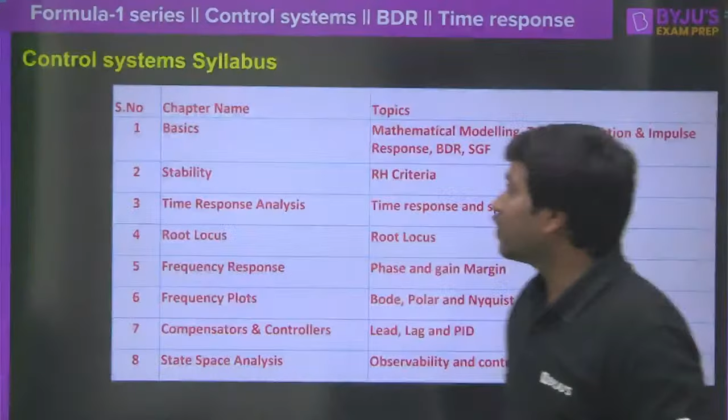So as I promised you, we are going to discuss control system, mostly the formulas, the important results, and important steps and procedures if you find any. Clear? So these are the chapters which we are going to cover.

All the topics are mentioned here, but focus on the chapters. Starting from the basics, we are going to see transfer function, impulse response, block diagram reduction, as well as signal flow graph. We will also see stability, time response analysis, root locus, and frequency response. Everything that is there in the control system we are going to discuss.

I am not going to leave any particular topic. As you all know, control system is a special subject, it will be having a minimum of 8 marks to maximum of 10 marks. So it is one of the most valuable subjects in the entire GATE preparation. If you are a serious aspirant, surely you will not miss any of the session.

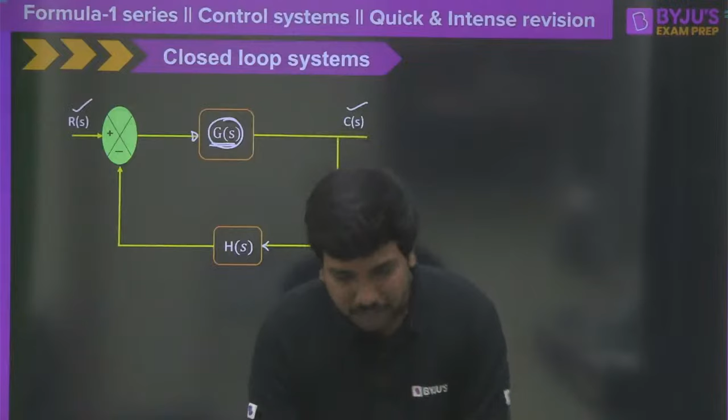The very first thing we require to understand is we are going to give our requirement or the target here, and people call this a set point. This is considered as the set point, and this is considered, of course, as the output of the control system. The ultimate purpose of the control system is...

...the response, that is C of t, must be as early as possible equal to R of t. That means at least this value should be as fast as possible to equal R of t, meaning the output of the control system should be equal to the desired target.

In simple words, suppose I am having an air conditioner. If I switch to 25 degrees centigrade, the 25 degrees given to the air conditioner is called the set point, and the room temperature is considered as the output of the control system. Ideally, what should happen?

If I give a set point of 25 degrees centigrade using the remote, the room temperature should finally equal 25 degrees centigrade. Then I can consider this air conditioner as a control system. To understand whether the output is really reaching the set point, and how fast it is reaching the set point, we must have the transfer function of the closed loop control system.

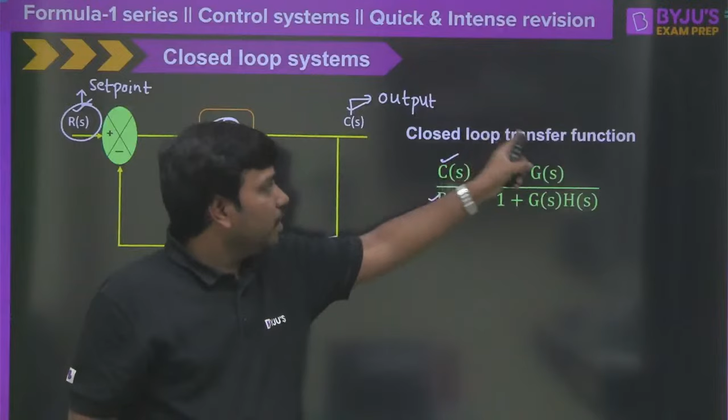As we see, the input R(S) is the input to the overall closed loop system, and C(S) is the output of the overall closed loop system. Therefore, C(S)/R(S) is called the transfer function of the entire closed loop control system. Now, the most important thing is the denominator of this closed loop transfer function, which is called the characteristic equation. Why is it called a characteristic equation?

Any one of you? 45 students are there. Love you guys, and I'm very glad to have a great response from all of you. Trust me, I will make this session wonderful and you will remember me your entire life. Please answer me and participate in the session.

Why do we call the denominator the characteristic equation? Because the denominator will decide the characteristics like stability of the overall control system, and it will also decide the time constant, time response, and many other characteristics depend on the denominator. That's why we call this the characteristic equation.

Now the most important thing is G(S) into H(S). Let me take another color so you will understand it better. This G(S) into H(S), some people call this simply the loop gain. Some people call this the loop gain, and of course, some people call this the open loop transfer function of the closed loop system.

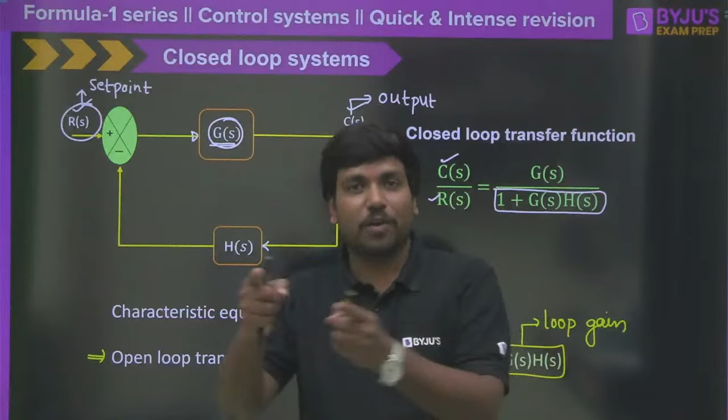Even I have seen many GATE questions where they simply mention open loop transfer function of the closed loop system, and many students will simply take this as G(S). No. If they say open loop transfer function of the closed loop control system, you must take that as G(S) into H(S).

Nice answers, right? Because poles will be decided by the characteristics of the system. More or less you have given the formal definition, but the truth is the characteristics of the system will be decided by the denominator. That's why we call that the characteristic equation.

Moving ahead, the very first chapter is very simple. However, it will be asked most of the times for 1 mark, and if you are lucky, there's a chance to get even 2 marks. Let me complete this topic quickly because there are very important topics coming soon. Let's give less importance to this since it's a very easy topic.

The block diagram reduction, as you know, has several rules, correct? Whenever I mention this topic, many students say that 8 to 10 rules exist - you take the point here, subtract here, add here, something like that. But trust me, if you are good at basic mathematics, you require only 3 important things for this.

The very first thing is, if 2 blocks are cascaded like this, then what will the result be? Any one of you? Please mention it. This is very simple, I know, but you should participate in the session so it will be more interactive and interesting, correct?

So if 2 blocks are cascaded, what will be the resultant block? The resultant block will be the product of these 2 blocks, correct? So G1 is the gain of the first block and G2 is the gain of the second block, and the resultant will be equal to G1 into G2, correct?

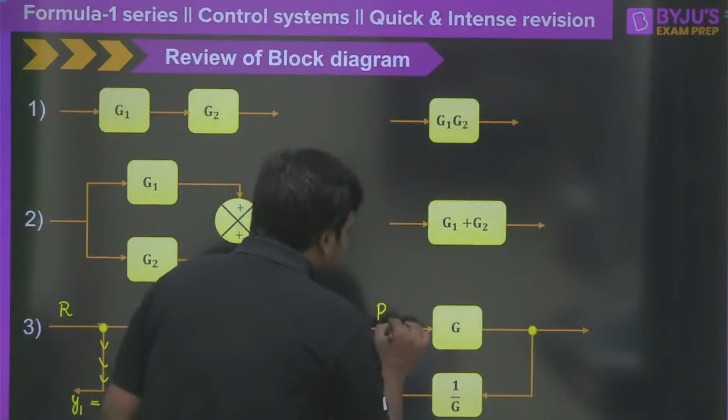Now how we can do? Simple. Suppose if you say it is still again R here, so then obviously this is going to become G into R. If it is G into R, then this will become G into R here, and G into R is multiplied by 1 by G. Then obviously you will be having R here, and once again I can say the output terminal here will be again it is equal to R. Clear? So that means if you take this point after the block, you must keep 1 by G here.

Now reverse is also possible. If you want to take this point after the block to before the block, then what we need to do? We need to multiply that with the G. That means 1 by G will be multiplied with the G, then obviously it will be having 1 like this. Clear? So these are the 3 things.

Yes, somebody is asking some question, right? Sindhu is asking some question. Sir, is this class enough to score control system?

Yes, obviously, because if you are sincere and if you are with me till the end, then only you can score. Okay.

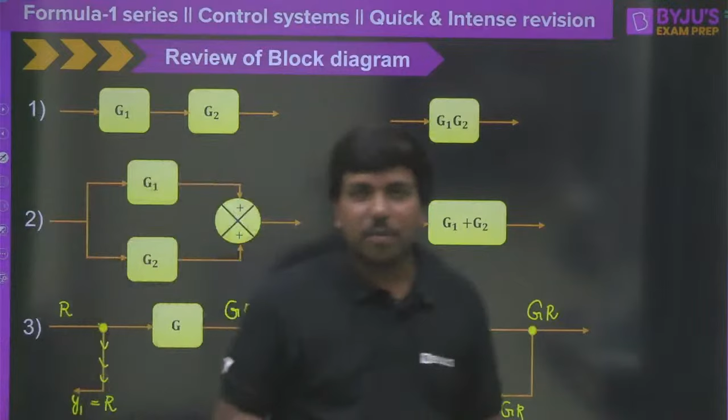Clear? Moving ahead to the next one, why negative feedback is more stable than the positive feedback in control system? Very good, Hrithik. So I will ask a simple question. Just assume that you and your brother are staying in the home, okay? And you and your brother both have fought, okay? So when you both are fighting, your father is the controller in your home, correct? So what your father has to do?

Whether he has to amplify the error or he has to reduce that conflict. He has to reduce the conflict. What happens in the negative feedback is, as the controller is understanding the error every time, it will act in such a way that the gap reduces between the actual target value and the present value. Clear? But in case of positive feedback, the error gets amplified.

Suppose your father is too aggressive. Already you and your brother are fighting. What is going to happen? Your father will come and shout like anything and he will slap you as well as your brother. Then what will happen? It is the amplification of the error, correct? So then the system will become unstable. One fine day you will say goodbye father, correct? So that is exactly the thing.

Clear? So now you can see the second thing, the signal flow graph, which is important in the control system subject, and sometimes it may be important even from the perspective of circuit theory also. So there are a few terms which you must understand one by one. I will go through that. After that, I will give the important formula related to the signal flow graph.

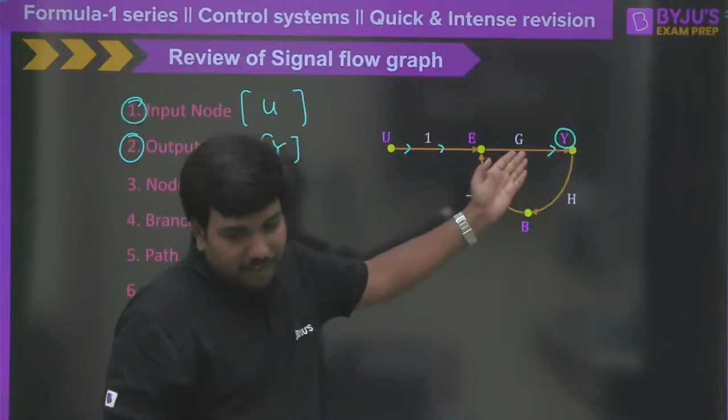Why? Because the feedback mechanism itself says that the output is taken from the end and given at the input side. That is called feedback. So from the output node, there is always a chance that you can take the data. So you must be very careful. That's why I see some students are saying no, and that's why I asked this question.

So now moving ahead to the third one, that is node. What do you mean by node? Simple. A node is a point of connection where at least two branches are connected, apart from the input node and sometimes even the output node. Now you can see what the nodes are here. U is a node, E is a node, and Y is also a node. We have only 3 nodes here.

Moving ahead, the next one is the branch. A branch is basically nothing but a path; in fact, a branch may be one single line in the path. So you can see here EY is considered a branch, UE is also considered a branch, and EY is also considered a branch. But what do you mean by path?

So path, you can say it has to have a starting point and ending point in a more defined way, and more importantly, see, from U to E and E to Y and Y to E, I can call this as a path, correct? U to E, E to Y and Y to E, I can call this as a path because I am able to travel along that, correct? So that is actually called a path, right?

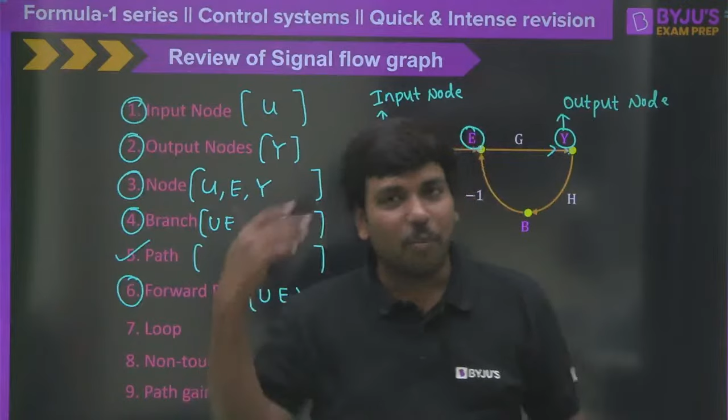Everybody is very actively participating. Keep like this till the end. Okay, same momentum. Because we have a lot of concepts to cover, Routh-Hurwitz criteria, root locus, gain margin, phase margin, polar plot, Nyquist plot, so many things are there, right? So be accurate and be on your toes.

Now loop. Loop means what? Start at any particular point, and you should be able to reach the same point once again, correct? So if we start at E here, from E I can go all the way to Y and then B and again E, correct? So therefore what should I say here? E, and then Y and then B, because B is also considered a node here, right? And then E here, correct? Of course B doesn't have any significance, but as it is mentioned, I am taking it. So E to Y, Y to B and B to E.

We can call that a loop if the starting node and ending node can be connected, correct? That means the starting node must be equal to the ending node. Now you see here when I write E, again E is coming at the end. So therefore this path is considered as a loop now.

Now can you tell me what is the gain of this loop? If I ask what is the gain of the loop, from E we are having G and then H and then -1. So when you are traveling along the path, whatever gains you have on the branches, you can multiply all of them to get the complete path gain, correct? So what is the complete path gain here? Minus G times H. Simple. Minus GH is considered the path gain, correct?

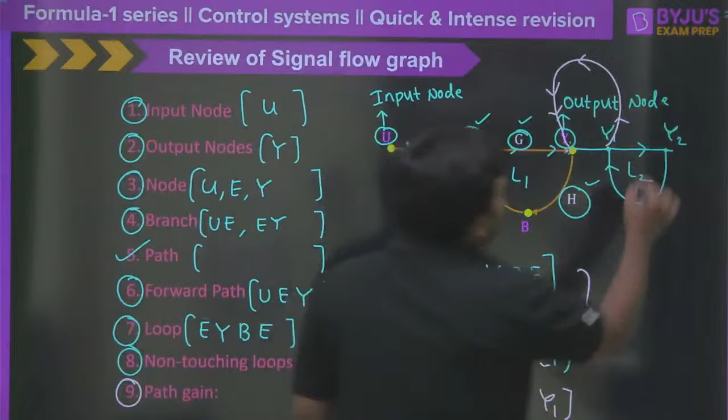Now let me go directly to path gain, which I already told you. Path gain means whatever gain you are getting throughout the path. Simply, I am asking a question: if this is 2 and this is 3, what is the loop gain of L2? Everyone answer this quickly. Y and Y dash are touching here? Where is Y dash? I don't show Y dash anywhere, right? Sindhu, where is Y dash?

Sir, can I crack GATE 2026 with AIR 50? Definitely everybody can crack, right?

So yes, 2 into 3, that is 6 here. That would be considered as the path gain. Path gain of what? Path gain of loop 2 here. I hope you understood the whole logic. So in short, I have explained each and every topic here.

Moving ahead, the overall transfer function or overall gain can be given by a special formula, Mason's formula, especially in the signal flow graph, which can be written as: transfer function equals the sum from k equals 1 to n of Pk delta k, divided by delta. In fact, n would be more appropriate here: n is the number of forward paths.

So if I say n equals 2, what does it mean? There are 2 different paths available to travel from the input node to the output node. So if n equals 2, the transfer function can be written as P1 delta 1 plus P2 delta 2, whole divided by delta, because k goes from 1 to 2. This is very easy to understand. Now let me explain each term.

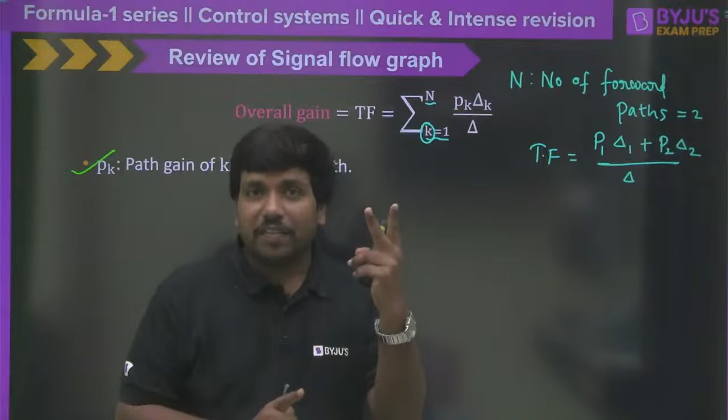Pk is the gain of the kth forward path. If you take the first forward path, you must use the gain of the first forward path; for the second, the gain of the second forward path. And n is the number of forward paths in the graph. Delta is the determinant of the graph, the most important thing in the entire Mason's formula. Delta is very simple: it can be written as 1 minus the sum of individual loop gains.

So can you tell me the individual loop gains? What is the loop gain of L1? Everyone please tell me, answer along with me. G and H and minus, so it would be minus G into H. That is simple. What is the loop gain of the second loop?

The second loop is 2 into 3; you already told me that is 6. So let me say this is 6. What is the third loop gain? Let us assume you started from here with 2, and this is 2 and this is 2. All the way, you will have 4 here.

Clear? You are having 4. Therefore, I can say all put together, there are 3 individual loops. We have to take the sum of all individual loop gains, and then sum of gain product of, this is very important, gain product of all combinations of two non-touching loops. This is wrong, 2 non-touching loops.

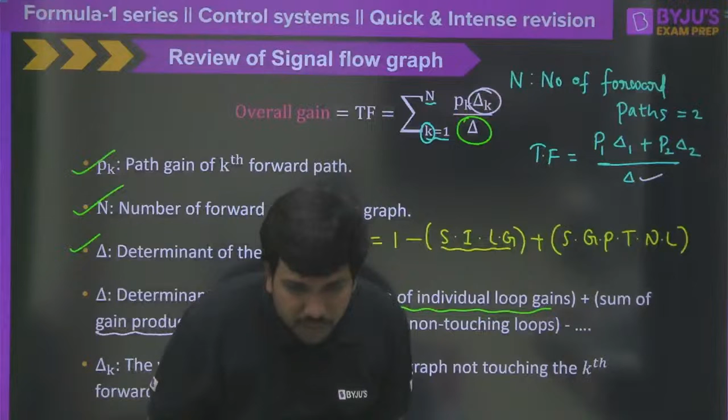Right? So this same formula you must apply, but everywhere this should be applied by not touching the forward path 1. Similarly, if you go for delta 2, it should not touch the forward path 2, but rest of the delta formula will be same. Now I have a question to every one of you. Most of the times, which kind of questions you have seen? 2 forward paths or 3 forward paths?

If you already solved the GATE previous year questions, you will understand that all GATE previous year questions on the signal flow graph are not at all difficult. Most of the times you will have maximum only 2 forward path gains. More than 2 they won't go. And sometimes they don't even go for 2. You will be having only 1 forward path. Clear? That's why this is sufficient to know here.

I hope I have covered the very first topic, that is signal flow graph as well as block diagram reduction. Of course, I have taken some time, but initially I may be taking some time, and once I pick up, everything will go very fast. Okay? Right, very good. Thank you very much. So first chapter is completed. So everybody, I need the response from you. Is it clear to all of you, or am I going a little bit fast, or you expect me to go a little bit fast? So many students are there, 60 students, everybody must answer to me.

The second chapter we are going to discuss is the time response analysis. So what do you mean by time response analysis? It's very simple. We will have a system, specifically a control system. We may apply different inputs and we will see how the response is varying with respect to time. Simple. Therefore, it is called a time response.

Suppose you have an amplifier, in analog electronics you will be seeing this. For the amplifier, we apply the DC input and see what the response is, so that is considered a DC response. After that, we apply an AC signal, AC input, and again see the response. So everywhere you are going to use the time response. Understanding the response with respect to time is called the time response.

This topic is not limited to only control system. It is there for circuit theory. It is there in analog electronics. Therefore, you must be with me till the end of this session. So moving ahead, the very first thing important to know in time response is different kinds of signals. So Hrithik is asking something.

Once explain delta 1 and delta 2, sir. Sindhu, I think you are learning this first time. Anyway, I will explain, don't worry. In a problem of signal flow graph, to find a transfer function, do we need to consider the loop gain at input node? Excellent question, Hrithik. I will make you answer this question.

The best example is, instead of using the letters, you use the numbers. At the input you started and again you came back to that. So what do you mean by input node basically? Input node means all the branches should go away from that. Suppose you have R here, let us call this Y1 and this Y2. You can call this the input node only if all branches are coming out of the node.

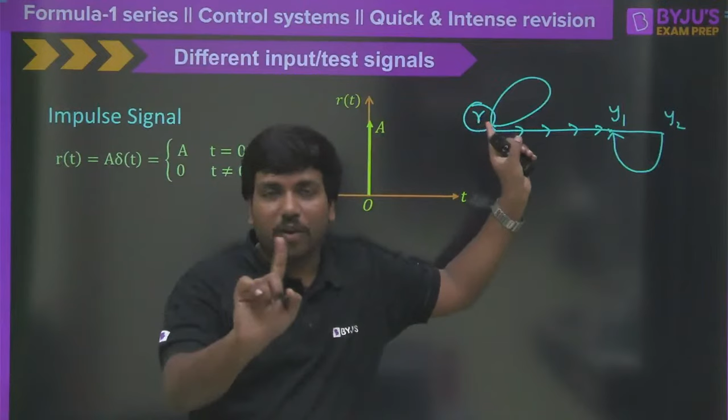But if there is a loop here, then how can you call that the input node? You cannot. So that's why usually when you have a loop at the input side, we will not take that into consideration. I hope every one of you understood this. Now let's move on to the next one, different types of input signals.

The very first test input signal we apply is the impulse, and we write the strength of the impulse. We don't call this the magnitude of the impulse; it is considered the area or the strength of the impulse signal. Exactly at t = 0 you will see a sudden spike with a strength of A. Therefore, we consider the input signal as r(t) = A δ(t). This has strength A only at t = 0; elsewhere the strength is 0.

Make a dummy node. Excellent, Satish. So to solve that question, when you have the same loop at the input node, we extend it and make a dummy node at the input side. That is the correct explanation. Now Hrithik, Samala, have you understood my explanation? I think Satish and Pankaj understood very well. I want to know whether Samala and Hrithik have understood it or not.

So nice. Now the impulse is very clear, but most of the time we need to know its Laplace transform. What is the Laplace transform of this one? Fatafat answer. Pramit, where are you? R(s) = A. Yes, clear, sir. Thank you. Now the second is the step signal. Step signal is nothing but a constantly maintained input.

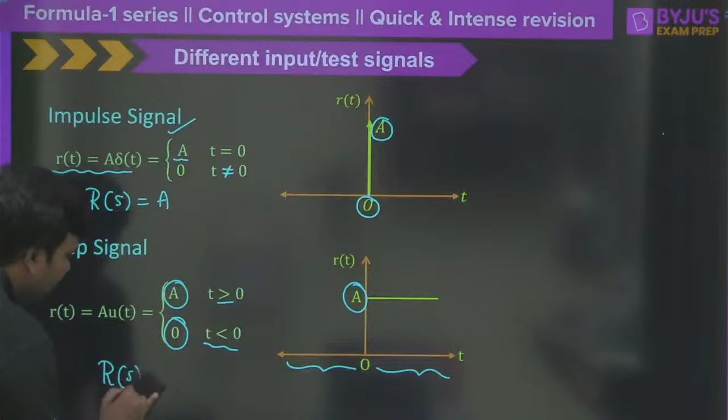And what is the Laplace transform? Obviously the Laplace transform R of S is equal to 1 divided by S. In fact, if it is A, then it must be considered as A by S.

Now likewise, we have another important signal called the ramp signal, which is R of t equals A times t into U of t. In this case, it is a linear function, meaning the signal strength increases with respect to time. The starting value might be 0, but as time progresses, the output value also progresses with a slope of A units. That's why it is R of t equals A into t into U of t. Therefore, R of S can be considered as A by S square. These things you need to keep at your fingertips.

Moving ahead to the next one, the parabolic signal. R of t, you can see, is like y equals m into x square, or y equals m into s square. This is how it is non-linear. But may I know what R of S is going to be here? Any one of you? Ashok, Samyukta, Hrithik, Satish, Pankaj, Pramit, Anita.

So can you tell me what the parabolic input Laplace transform is? There will be a square term, and 2 factorial will be there, so it becomes 2 divided by s cube. That is, 2 times A divided by s cube. I hope you understood this, is it clear to all of you? Yes, 2 by s cube, A is there, so don't forget that.

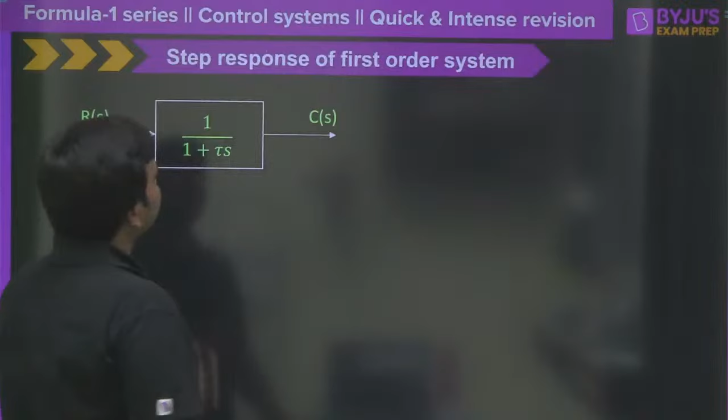Now let me move to the next topic, the step response of the first order system. Whenever I say first order system, let me clearly tell you, most students don't know this properly. They say C of s by R of s should equal ks divided by 1 plus tau s. But remember, in general a first order system means something slightly different. Today you are going to learn some new important points.

So please see here, if I say some general system, y of s by x of s, that is a general first order system: y of s by x of s equals ks by 1 plus tau s. Here, ks is considered as the static gain, steady state gain, or DC gain, and tau is considered as the time constant. This is known to everyone.

But whenever I say first order control system, that's different. There is a difference between a first order system and a first order control system. If I use the first order control system, then the output will be written as C of s, and the input must be written as R of s. This is the first order system, but this is the first order control system. Now tell me, if it is a first order control system, what must happen here? The difference is here you will be having 1 divided by 1 plus tau s.

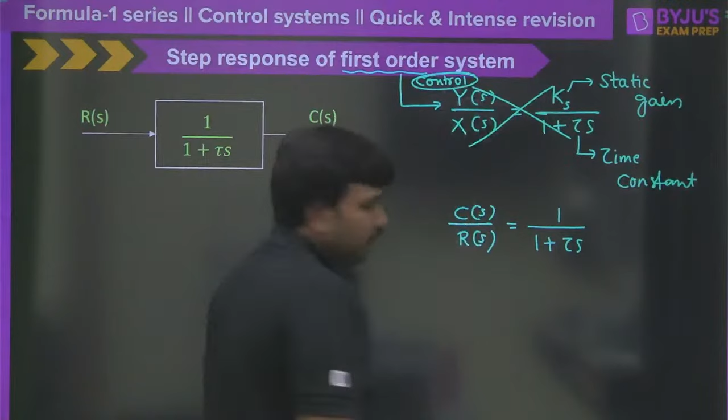So you must know what is the classical difference here. As we are not going to discuss about the system performance here, we are mainly aiming for the control system, correct? So let me take C of s by R of s is equal to 1 by 1 plus tau s, and we are having here C of s and R of s clearly here, right?

So now what is most important for us is the step response, because you can apply impulse, you can apply ramp, you can apply many things, but ultimately that is what we require to study here, because right now we are in Formula 1 series, right? So step response. Step response means what? What is the input we are applying here?

So R of t must be equal to, let's assume that unit step response here. If I say unit step response, R of t must be equal to 1 into U of t. Therefore R of s undoubtedly it will be equal to 1 by s. And you can multiply 1 by s with this 1 by 1 plus tau s and finally get C of s. And if you want C of t, how you will find C of t? You will find Laplace inverse of C of s.

But how we will be having C of s here? L inverse of C of s is nothing but R of s value that should be multiplied by the G of s value. Let's assume that this is G of s, for example, or T of s, K of s, anything, no problem, right? So this would be written as 1 by s into 1 divided by 1 plus tau s. And once you take the inverse Laplace transform of this, then you will get the step response, correct?

So probably you all might be knowing that step response here. So let me directly write down here. So the step response, obviously this is considered as a step response. Now every one of you must tell me one important factor here.

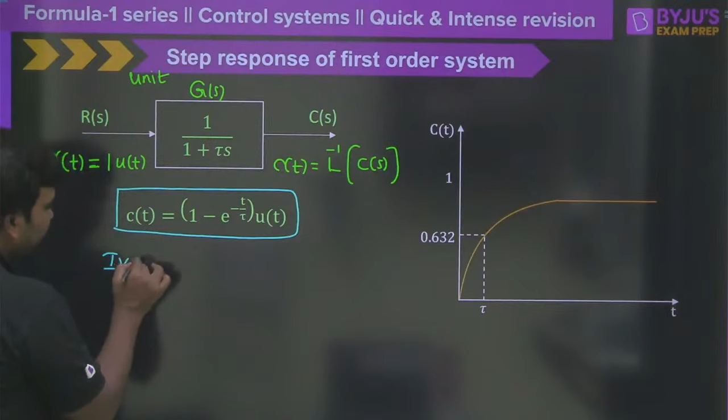What is the initial value of this response? Initial value. If I ask initial value, that is very simple to say. Initial value, let me write down, that is IV, which is equal to C of 0. Substitute t is equal to 0. Then it will become like 1 minus e power 0 whole, right? So 1 minus e power 0, that will be 0.

Simple. And what about the final value here? Final value means we will substitute t is equal to infinity, correct? When you substitute t is equal to infinity, then you will be finding that 1 minus e power minus infinity all the way this will be again equal to 0, correct?

Then if we start plotting the graph for C of t, which is nothing but the step response, this is the way how the graph looks like, correct? Most of you know this point, right? So the step input, let me say all the way it might be up to here, step input, and the time constant is nothing but the value where your output response, this is C of t, graph is C of t, reaches 63.2% of the final output if the initial value starts from 0, correct? So 63.2% of 1 is how much? It is 0.632. That's why it is called as a time constant.

Clear? Now everyone, t is equal to infinity, it should be like 1, sir, right? Oh, I am sorry, extremely sorry. Thank you guys, thank you very much. So small mistake, 1 minus e power minus infinity, so that would be equal to 0, so it should be equal to 1. Thank you very much. So now what is going to be the settling time here?

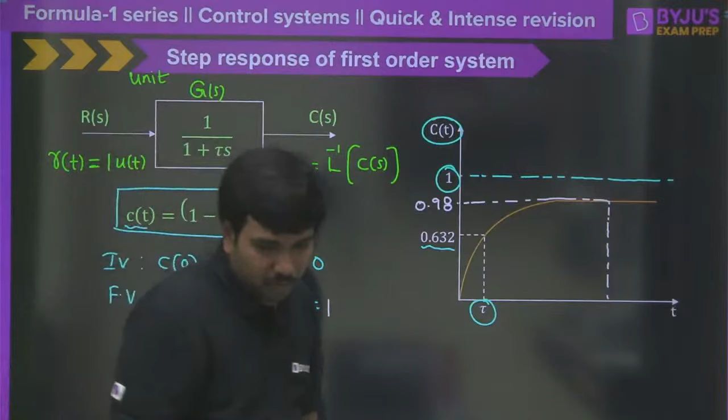What is the formula? E power minus infinity is 0. Anita, wrong, e power minus infinity is wrong. Just check it. Okay, e power minus infinity is 0. Yes, Anita, good. So tell me, what is the settling time here?

So this time where the step response reaches 98% of the final value, that particular time will be called the settling time, which is nothing but 4 tau. This is one important formula. Clear?

At the same time, rise time is another important formula here. Anyone, in first order system, what is the formula for rise time? Hereafter you must be very active and quickly answer my questions. Around 50 students are live, you must be fast and quick to give answers. You like me, you love me, so you must participate in the session too. So T rise is what?

T rise will be equal to 2.2 approximately. I am writing, don't argue with me, sir, it is 2.222 like that - don't say that. So it is approximately equal to 2.2 tau.

If anybody is very interested to know how this formula comes, what is the meaning of rise time, and how to derive it, you can refer to my BYJU'S exam prep lectures, recorded or live. There you can find the definition, derivation, everything. If I start to derive everything, the purpose of the whole session will go off.

So rise time is equal to 2.22 tau and the settling time, as I was saying, is equal to 4 tau here. Clear? Now let's move on to the next one, that is the second order system.

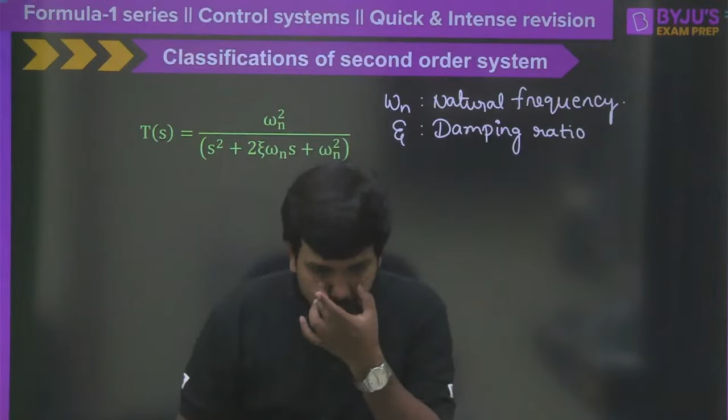Gajendra Singh, wonderful question you are asking - sir, why is rise time 10 to 90% in some cases and 0 to 100% in some cases? Good question, I'll tell you simply. Whatever input you apply for whichever system, we generally expect a quick response. If the response is very quick, then we will take 0 to 100% because there is a chance it may reach from 0 to 100%. But if you feel the response is not so quick enough, then we will aim to take from 10 to 90%. There are two reasons.

Reaching 100% may take a lot of time, so we cannot conclude that - that's why we keep the higher limit as 90%, and 0% it may start very fast, that's why we start from 10%. So everything is for our comfort here, because sometimes the system may start with a huge immediate response and even touch the final value of 100% in very little time. If that is the case, you can consider rise time as 0 to 100%. But if you know it will take a lot of time to settle at 100%, then we limit ourselves to 90% because we don't have the patience to wait for 100%. Clear?

I hope Gajendra, it's clear to you, right?

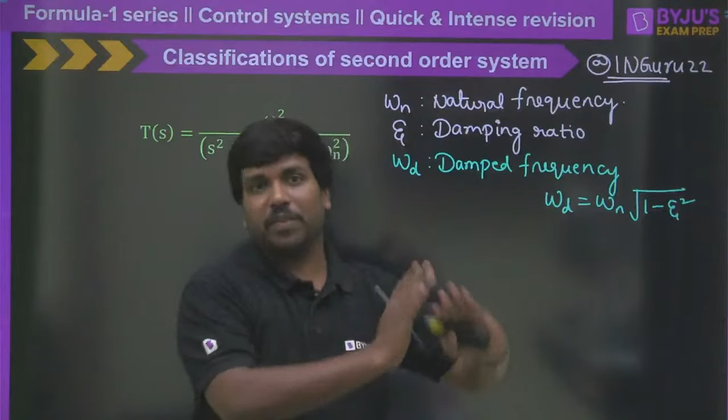So the natural frequency of the sinusoidal wave coming out of the oscillator depends on the inductance and capacitance. Means charging elements. Clear? That means in a very complicated system, look at which are the elements that cannot react instantaneously. Natural frequency depends on those elements. Suppose if you take RLC circuit, we all know very well that in RLC circuit, inductor and capacitor cannot react very fast.

So that's why these two will participate in deciding the frequency of the waveform, because they will be exchanging the energy, right? So that is the principle. I hope you understood that. I think today I have given a wonderful statement. So who is this? Harinataraju, please tell me, have you got the point now? And this is a new point. Thanks for asking this question. I think many of the students got today only how natural frequency is going to change. Yes, very good, Ravi Shankar.

Now, omega d is considered as a damped frequency. However, depending upon the zeta value, the second order systems will be classified like this. If zeta is equal to 0, we call that an undamped system, and if zeta is in between 0 to 1, we call that an underdamped system. If zeta is equal to 1, critically damped, and zeta greater than 1 is considered an overdamped system. Now moving ahead to the next one, the step response of second order system.

That means we will take the second order control system, because we are in the topic of control system. So take the second order system and apply the step input, especially for underdamped system. Underdamped system, zeta must be in between 0 to 1, correct? For that kind of system, if you apply step input, then you will get the step response like this. The step response will be exactly like this.

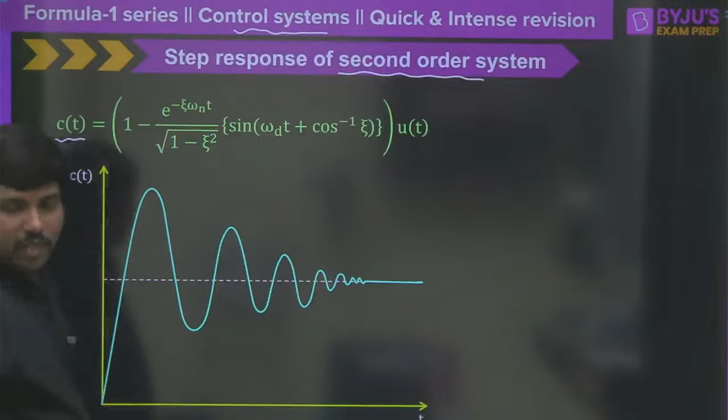In this step response, the most important terms are 1 minus e power minus zeta omega n t over under root of 1 minus zeta square, sin omega d t. Each and every term you know here. The only point is cos inverse of zeta. Some people are not interested to write it, so they will write this as phi. So if you start writing this as phi, how will the whole formula change?

Now the whole formula can be written as 1 minus e power minus zeta omega n t, whole divided by under root of 1 minus zeta square, into sin of omega d t plus phi. Clear? So this phi could be written as cos inverse of zeta, or this phi can be written as, look at that, this is very, very important.

Sometimes you may be asked many questions on this. Sin inverse of under root of 1 minus zeta square, or it can be written as, so this is again one more formula. It can also be called tan inverse of under root of 1 minus zeta square divided by zeta.

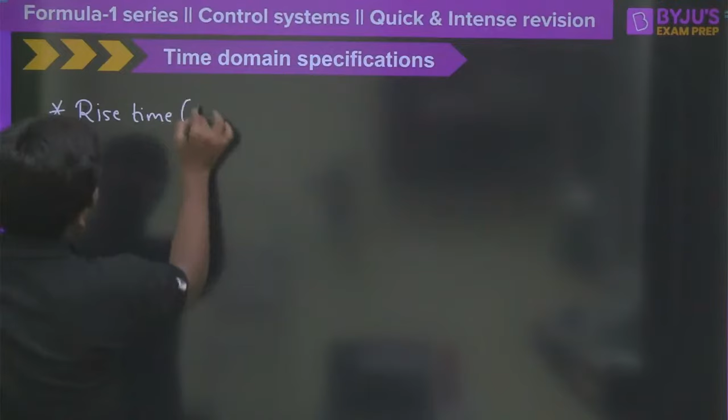Let me know first of all what is a very important formula here. Rise time, correct? Because you people are looking very sincere, let me write down everything here. So the first point is rise time. What is the formula for rise time? Don't see any notebooks, just listen to me and recall your concepts. So the rise time could be written as pi minus phi divided by omega d. Is it correct or not? Pi minus phi by omega d.

Where pi is a simple value, that is 3.14, and phi is nothing but cos inverse of zeta. Everyone start recalling the formulas one by one, because we are in a race, right? So pi minus phi divided by omega d, where omega d is omega n under root of 1 minus zeta square. Don't keep any notebook with you, just follow me and listen to the class.

The second important formula here is peak time, and here the real game will be there. Peak time means the time taken for the output to reach the peak value. Correct? That would usually be given as n into pi divided by omega d, and many times there is a question on this topic.

Many times, so many times they ask the question on this. So tell me what is the value here. Suppose for n is equal to 1, 3, 5, etc., you will be getting first, second, third overshoots here. Clear? So you will be getting first, second, third overshoots. In fact, I can say if the value of n is an odd number, you will be getting the overshoots.

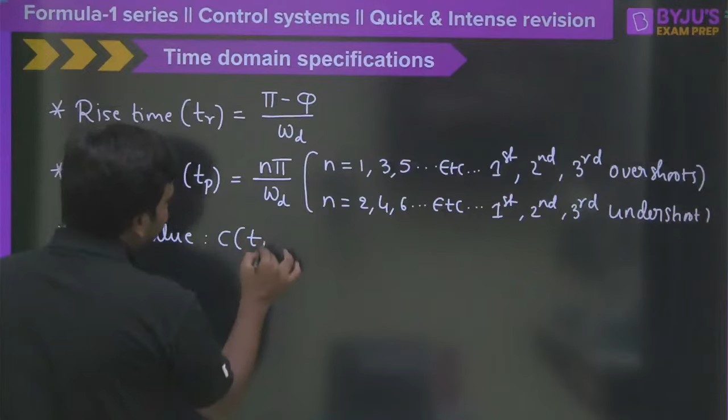And the next one, what is the next one? Next one is peak value. What is the peak value? How do we find the peak value? Simple. Peak value could be written as C of tp. Very easy, right? So go back here, substitute the peak time in the expression, then you are going to get the peak value. Simple, very easy.

Now the next and most important thing, countless number of times they ask this question, that is percentage of peak overshoot. So let me write down percentage of peak overshoot. POS means peak overshoot, which we call Mp. Any one of you, what is the percentage of peak overshoot? It should be written as e power minus zeta pi by under root of 1 minus zeta square, whole into 100. Clear? This is the percentage of peak overshoot formula, which is again very, very important.

And last but not least, settling time. So now you should be fast enough. Settling time, there are two formulas. One is 3 by zeta omega n, and ts is equal to 4 by zeta omega n. Tell me what is the difference between these two? Any one of you, what is the difference?

4 by zeta omega n is for 2% band of the final value. Output must reach within plus or minus 2% of the final value. Clear? Here it is going to be the 5% criterion, so that is 5% band of the final value. Clear? So hope you understood these two things. Many times I have seen the questions will be very straightforward. They will ask what is the settling time for the 2% criterion. 2% criterion means you should take 4 by zeta omega n.

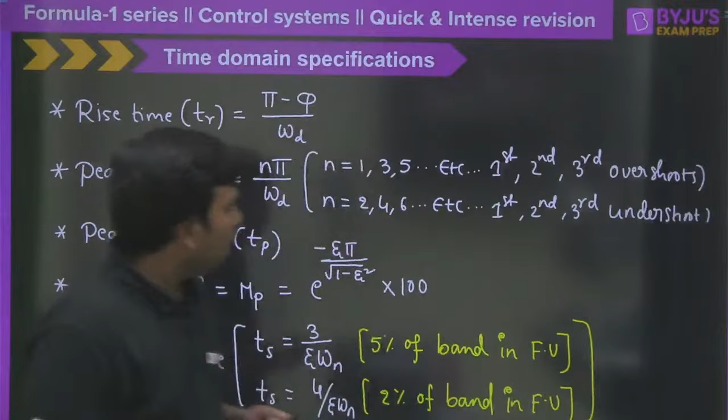So moving ahead, steady state error. I will tell you the easiest way to answer any question in steady state error. Don't run behind the formula.

In this case, don't run behind the formula. Try to restrict yourself to the basics. Don't go like, different formula for non-unity feedback system, different formula for unity feedback system, all these things, right? People made so many complex things. Easy way is, look at where the question is.

Error is actually nothing but, listen carefully, it could be written as simply E of t, which is nothing but the difference between the target and the present value. This is a simple catch, right? You need not mess up anything.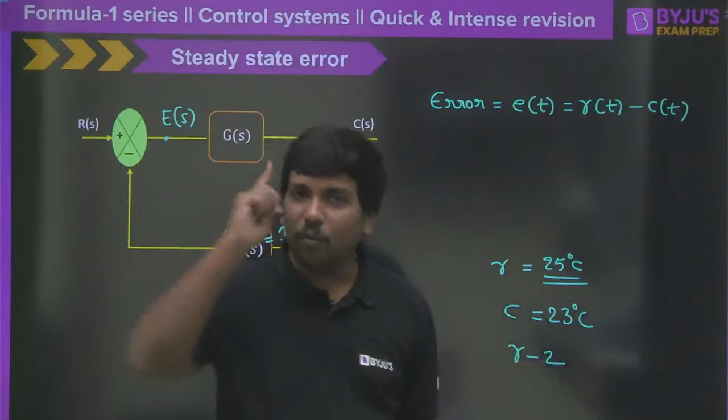If it is clear, then don't worry about whether unity feedback is given or non-unity feedback is given, how to convert non-unity to unity, unity to non-unity. This many formulas are not required. The only thing required is error E of t is equal to R of t minus C of t. But by God's grace, 99.9% of the time you will be given a unity feedback. So you will be lucky, right? So this is mentioned like this.

Now moving ahead, E of t is known to you. Then what does steady state error mean? Let me write down steady state error as SSE, which is equal to error at t equal to infinity. So it could be written as E of infinity equal to R of infinity minus C of infinity. That means wait for some time and see the difference between the desired input and the actual value of the output. The desired input is R of infinity, the actual value of the output is C of infinity.

In our case, R of infinity is 25 degrees centigrade. Means after 20 minutes also, the required room temperature is still 25 degrees centigrade. But C of infinity is 23 degrees centigrade. That's why we have 2 degrees centigrade as an error. Clear?

Some people are not very happy with writing this. Rather, they will convert this into the Laplace form. If we convert this into the Laplace form, the error E of s could be written as R of s minus C of s. And if you want E of infinity by using the final value theorem, E of infinity can be written as limit s tends to 0, s into E of s. And as we know here, limit s tends to 0, no problem with this one.

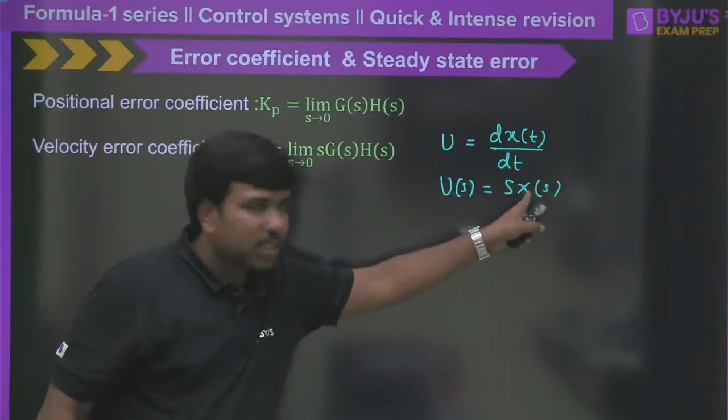how do you get velocity? Velocity is equal to dx of t by dt. Correct? So if you take the Laplace transform of velocity, what are you going to get? s into X of s, if the initial value is 0. That means for the velocity error coefficient, you should multiply with s. That's why it is limit s tends to 0 of s into G of s into H of s. Additionally, we have s here for the velocity. Simple way to understand. Correct?

And you may ask, sir, what is this positional error coefficient and velocity error coefficient? As I was saying, if anybody is too much interested to know the concept, please go to the lectures. Let's discuss the formula here. The acceleration error coefficient could be written as limit s tends to 0 of s square into G of s into H of s. Clear? These things are sufficient to answer any question in steady state error.

But there is one table in steady state error, and most of the students regularly ask, sir, please discuss the table. I know personally that the table is not required to answer any question, but for your satisfaction I have to do it. So let me explain that also. Here, if I take step input, then ramp input, and the last one is going to be parabolic input.

Now, if I start the left side with the type 0 system, type 1 system and type 2 system. Clear? What do you mean by type of a system? Pramit and Ashok and all of you, please tell me. Type of a system is nothing but the number of poles at the origin. Suppose G of s is equal to 1 divided by s square into s plus 1.

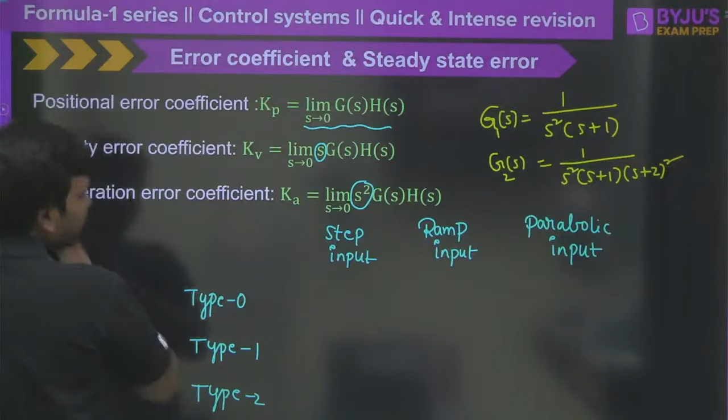What is the type of the system? And G of s is equal to 1 by s square into s plus 1 into s plus 2 whole square. So what is the type of the first and second system? Every one of you must answer this. Type of the first system is the number of poles at the origin, that is 2. And even in the second case, number of poles at the origin is 2. So therefore it is going to be 2.

Clear? So why are we so interested only in the type? Why not the order? Have you ever investigated this? It will be so interesting. Mathematically you may say that s will get cancelled in the calculation of steady state error, that's why we take the type.

No, the idea is, if you look at G1 and G2, the type remains same, but the order may be different, correct? So what does it mean? If you go with the type, then we can generalize the steady state error. If you go with the order, we cannot generalize, because G1 and G2 might have the same type but different order. So it is better to take the type of the system as the reference rather than the order of the system.

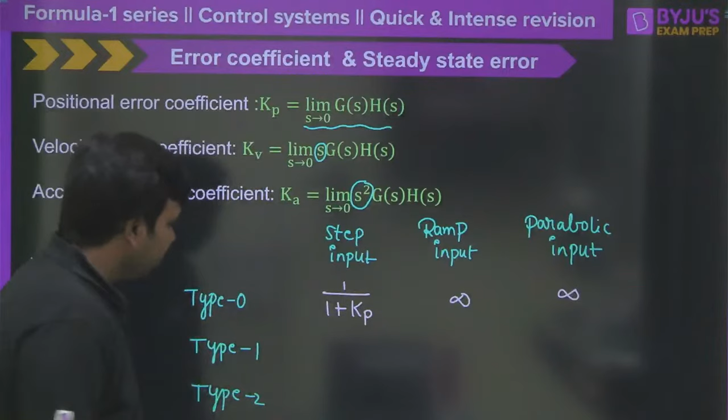Next, type 1 system: this is 0 here, because when we apply the ramp only velocity error will exist, so that is velocity coefficient 1 by kv. Of course this would be considered as infinity.

And the third one, it is 0 and 0, it is going to be 1 divided by Ka. If you can remember this formula, directly you can see the question, look at what input you are applying and what is the type of the system. If you know these two things, directly you can solve the question. That is one easy thing.

As I was saying, I have topped the GATE more than 10, 11 times. My personal experience says that instead of going for kacha-bicha formulas, it is better to believe your basics. The reason is, there is a chance they may ask the question if the feedback is not having unity gain. In that case, this concept will help you.

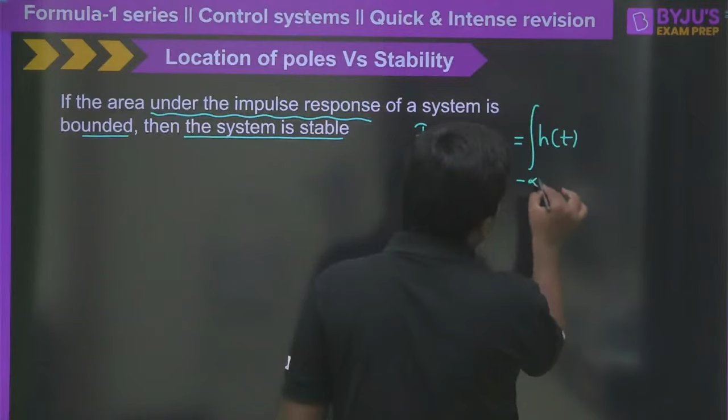What we do is take the area under this curve, that is from minus infinity to infinity of h of t. If this area under the curve is finite, then I can say this is the bounded output, or the area under the impulse response is bounded. So the system is a stable system.

How do we need to use the dominant pole concept in solving the problem? Are you asking how to solve for the dominant pole, or asking what is the practical significance of the dominant pole? Please let me know the question clearly.

Bibo says finite input range. Excellent. Hrithik, please let me know, do you want me to explain the physical significance of the dominant pole concept, or do you want me to explain how to solve the dominant pole question? Please let me know.

So suppose let us say, there is one particular system.

Assume that there is some system here. Its impulse response h of t is coming equal to e power minus 2t. E power minus 2t is the impulse response.

Now tell me, for this system, if I integrate the response, or find the area under the response, is it finite or infinite? In solving the question, you want the mathematical application. Please Hrithik, just hold for 2 minutes, I will explain, don't worry.

H of t is equal to e power minus 2t. Now the most important thing is, if you look at the graph of h of t, it goes like this. This is the exponentially decreasing graph. So what does it mean here?

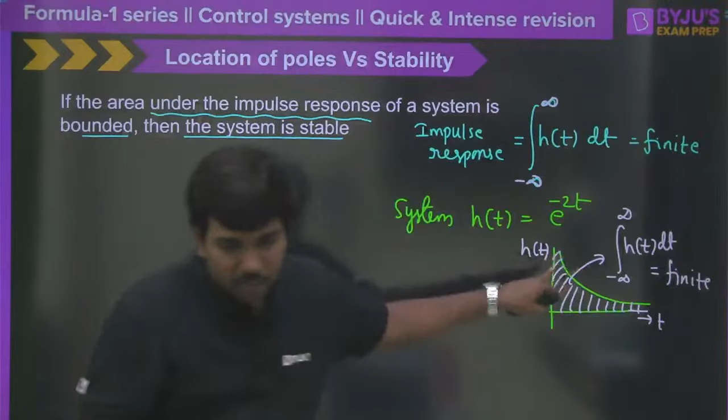So now I request you to take the Laplace transform of this one. What will you get? 1 by s plus 2, correct? E power minus 2t means it is 1 by s plus 2, isn't it?

This means, what is the pole of this one now? The pole is going to be, look at that, pole is s is equal to minus 2, am I right? Pole is equal to s is equal to minus 2.

What does it mean? If the pole is a negative value, that is minus 2 or negative real number, then I am sure that you will get an exponentially decaying response in the impulse, and then the area under the impulse response is bounded. That's why we call this a stable system by using the BIBO principle.

Now I will explain another way. So this is system 1. System 2, if you look at, h of t might be like e power 2t here. E power 2t. In this case, what will happen? It is an exponentially increasing graph here.

So if you start collecting the area under this graph, it will become infinite. That's why if you look at the pole of this one, how it looks, 1 divided by s minus 2, if you take the Laplace transform of this one. So the Laplace transform of this one is going to be 1 by s minus 2. That means the pole is there in the right hand side of the s plane.

So the impulse response is unbounded. So the system is unstable. That means technically we may speak only with respect to the location of the pole in the s plane. But basically, location of the pole in the S-plane inherently explains the impulse response, or informs you about the integration of the impulse response.

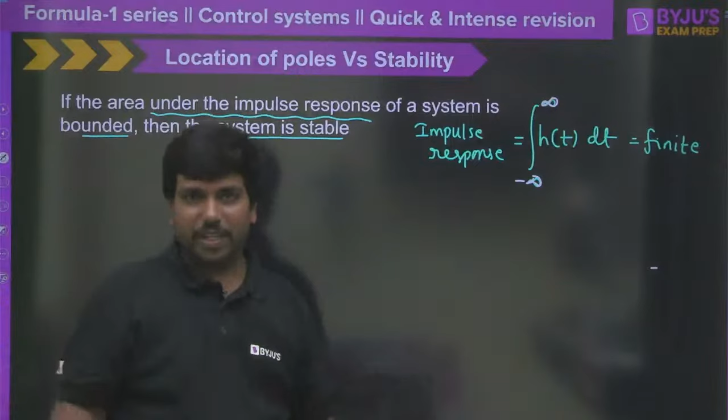So in short, it is very difficult to go with each and everything here. So the very important thing is, if all the poles of a system, any system, closed loop or open loop, lie in the left half of the S-plane, then the system is stable.

So if they ask a question like whether the closed loop system is stable or not, you should look at the closed loop poles. If they ask about open loop, you should look at the open loop poles. If all the poles, not even a single pole, lie on the right hand side, all poles must stay in the left hand side of the S-plane, then I can say the closed loop system is stable.

Second, if one pole lies at the origin, or complex conjugate poles lie on the imaginary axis, then the system is marginally stable. This is very, very important.

If at least one pole lies at the origin or there are complex conjugate poles on the imaginary axis, then this system is marginally stable. Yes, this is correct. What do you mean by that? Let me tell you in a simple way.

First case: look at the S-plane, with sigma and minus sigma on one axis, and j omega and minus j omega on the other. All poles might be anywhere on the left hand side - one pole, another pole, a third pole, like this. If all poles lie in the left hand side of the S-plane, then the system is stable. Absolutely it is stable, correct?

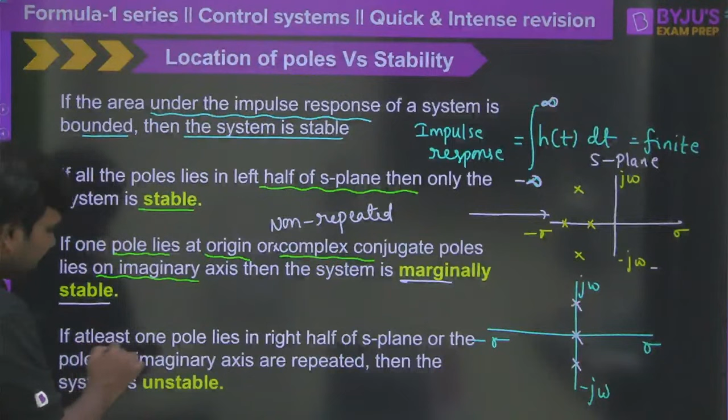And in case the poles on the imaginary axis are repeated, look at that - if at least one pole lies in the right hand side of the S-plane, this is very, very important, at least one pole lies in the right side of the S-plane, or the poles on the imaginary axis are repeated, then the system is unstable. Clear? Then the system is unstable.

Now I will ask a simple question to everyone. This is for explanation purposes, but in the notes you must have all these 3 points. So everyone take your rough paper and pen with you and answer the questions I am going to put now. Everyone must be fast enough to answer.

Suppose I have the j omega axis like this, with j omega, minus j omega, sigma, and minus sigma. Now, can anyone tell me - suppose I have one pole here and another pole here, written like 2j and minus 2j. Tell me whether this system is marginally stable or unstable. Everyone, fast, all 42 students should answer this question.

If you are having the poles only on the imaginary axis, this is a marginally stable system, correct? It's not repeated, it's there on the imaginary axis. Now if I have one more pole like this - yes, because if you are having non-repeated poles on the imaginary axis, then the system is a marginally stable system.

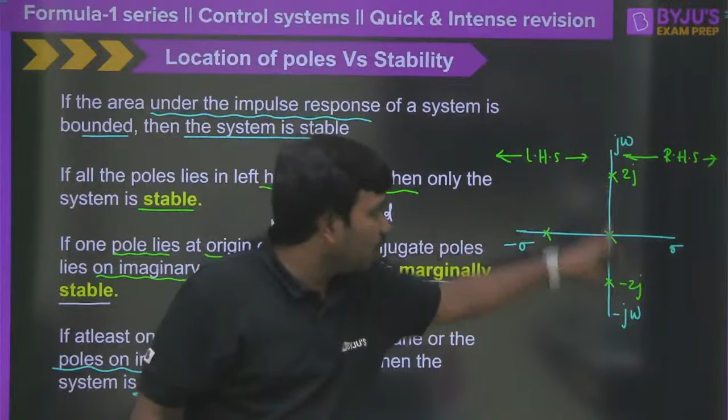Now I will ask a simple question. Suppose if I say you have two poles at the origin, then everyone tell me, what is going to happen? The whole system now will become unstable. Why? Because the pole which is there at the origin, on the imaginary axis, is repeated, correct?

If it is repeated, as I said, if the poles on the imaginary axis are repeated - and the origin is also on the imaginary axis - repeated, then the system is unstable. That means the addition of a pole, or the pole placement, can change the stability of a system.

That's why control system is very interesting. I can make a stable system an unstable system, or I can make an unstable system a stable system, only by changing the location of the poles or adding new poles into the existing system. Clear? So hope you understood this one, right?

So interesting. Now tell me, suppose there might be a chance that we have 1 by s. This is a marginally stable system. If I want to make this intentionally unstable, what will I do? I will just multiply it with an integrator. So this is the exact system and I am cascading it with the integrator. When I cascade the integrator to the existing plant, in total it will become 1 by s square. Then you are going to get repeated poles there.

That means if we have G of s as 1 by s, Gp of s or the plant transfer function as G of s, and if you use the controller as 1 by s, that is the integral controller, then the integral controller is connected to the 1 by s plant. Then what is going to happen? These two, when they are cascaded, become 1 by s square. Then the poles will be repeated and the closed loop system will become unstable.

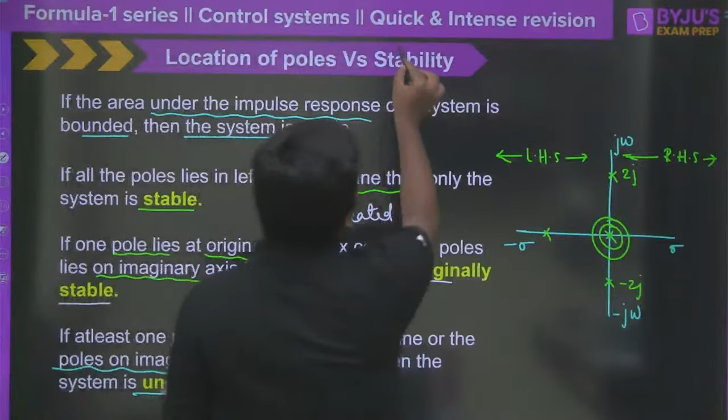So this is the way we are able to say whether the system is stable or unstable just by looking at the pole placement here. Clear? Right. So now moving ahead to the next one, there are several tools for finding the stability, right? The best technique, in fact the fundamental technique, is the RH criteria. I should say that even root locus can also give the stability analysis. Not only root locus, right? In root locus, the advantage is it is going to give the time domain specifications also.

And then stability can also be found by gain margin and phase margin, and stability can also be found by the Bode plot, polar plot, and Nyquist plot. So the context is, whatever you are going to study from now onwards, more or less the main intention is to find out the stability. Clear? Sir, waiting for root locus. Okay. I am coming to root locus, right?

Sir, it also improves our knowledge. Good, very much. Thank you very much, Pankaj. You people are really motivating me. Even today I am not feeling so well, but after seeing your energy and your interest, I am also getting boosted.

Okay, right. So now moving ahead to the Routh-Hurwitz criteria, as I was saying. Consider the nth order characteristic equation. First of all, how to construct the Routh table. Suppose you have a polynomial like this, what will we do? First we will frame the fundamental rows of the Routh array, starting with s power n, s power n minus 1, and here we will have s power n minus 2, something like that, and we will go up to s power 0 here.

Clear? So when you are writing the data here, first we will write the coefficient a n, leave the next one, go to the next coefficient and write it here, and leave the next alternate coefficient and write down this one. For s power n minus 1, we will write the intermediate ones. That means when writing the s power n minus 1 row, we will first take the s power n minus 1 coefficient, then leave the next one and go alternately like this. These two rows are called the fundamental rows of the Routh table.

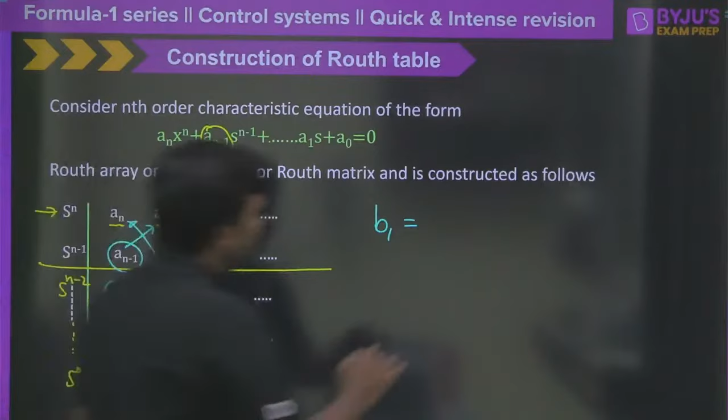After framing the fundamental rows, the immediate observation is you have to make b1 here and b2 here. What is the value of b1? Simple. b1 can be written as this into this minus this into this, divided by this, correct? So this value will be equal to a n minus 1 into a n minus 2 minus a n into a n minus 3, whole divided by a n minus 1. That is b1.

So this value should be divided with this. So this is an minus 1. Similarly, b2, if you do it, what is the value of b2 here? So b2 means from here to here you have to take, and this to this, of course, and divided by this one. So therefore, I can write down clearly that it is going to be equal to an minus 1 into an minus 4 minus an into an minus 5, of course, divided by what should be there here. Again, it is going to be an minus 1. Likewise, we will continue the same thing.

Sir, explanation is secret of our energy. Sir, thank you very much. Thank you very much. Right.

So this is the way we will continue the Routh table. Just as I required to explain this, I am explaining, but I feel that every one of you know about the Routh table. Correct? Without any idea about the Routh table, you people might not be sitting in this class. Correct or not? So let me directly go to the conclusions. How do we find the stability here? So the easiest thing is, if there is no sign change in the first column of the Routh table, then the closed loop system is stable. Clear?

Now I have a second question. For a given characteristic equation, we will try to find out the Routh table. So it may be like s power 3, s square, s power 1, s power 0. And when we do all the calculations, we will look at the first column of the Routh table. And if there are no sign changes in the first column of the Routh table, then we say that the closed loop system is stable. Now I will ask the questions the reverse way.

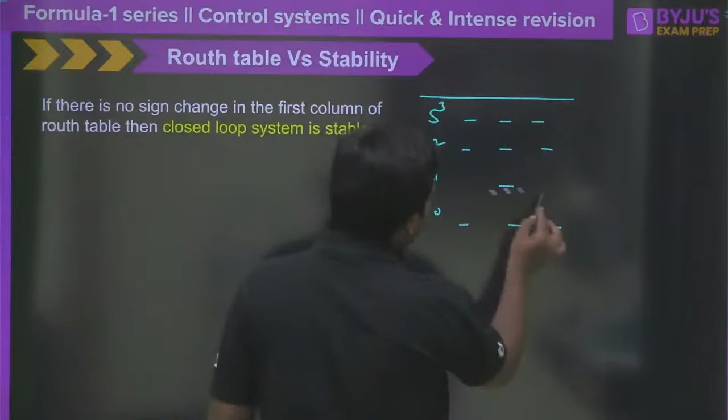For example, assume that for a particular case, I framed the Routh table. I am taking an example here. s power 3, s power 2, s power 1, s power 0, and it is like 3, 4, 5, and here minus 3 and 6 and 7, and here maybe 2, 0, 1, and here 1. Now tell me whether this system is stable or unstable. Every one of you, Ashok, Narasimha, Ravi, please let me know.

So if you look at the first column of the Routh array, there is a sign change. Here it is a positive number, here it is a negative number. That means one sign change is there. Again from negative to positive, the second sign change. Therefore, we say that this system is unstable. As there are two sign changes, two roots of the characteristic equation lie in the right hand side of the S plane. Clear? So therefore, we can write down the conclusion like this.

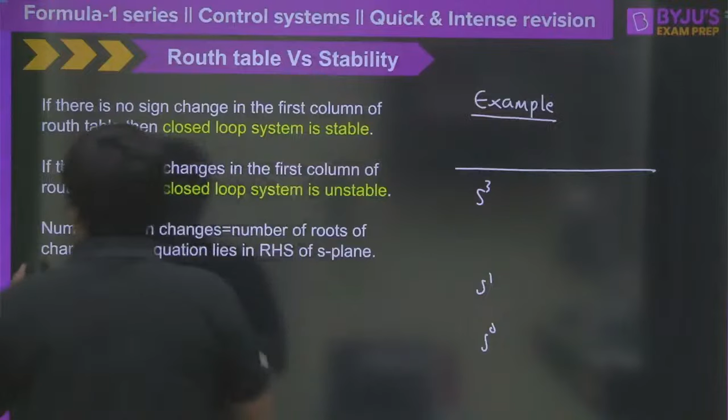If there are sign changes in the first column of the Routh table, then the closed loop system is unstable. Of course, the number of sign changes is equal to the number of roots of the characteristic equation lying in the right hand side of the S plane. Now I have one beautiful question to all of you. Just revise with me, just think with me, right?

Have you ever got this kind of situation? We have 3 here, 4 here, 5. Maybe this term might be 0, and here you might be having 4, 6. Then what do we need to do? In case the first element of any row becomes 0, you must take this as epsilon, a very small positive number, and you should continue the algorithm and finish the Routh table. That means instead of 0, replace it with epsilon.

This is very, very important, right? So what I will do here now, instead of that, I will keep this as epsilon here, and then continue to make it. So that means 4 times epsilon here, minus 12, divided by epsilon. Likewise, I will continue till the end, right?

So then what we will do here, after making the continuation, once you find the entire Routh table, then at each and every term, I told you that epsilon is a small positive number. Why will we take only a positive number? Why not a negative number? Why will we take only a small positive number? These kinds of questions I used to get in the regular classes.

Because we don't want to intentionally make the system unstable, correct? We will take this as a small positive number and we will continue the algorithm. If you are not getting any sign changes, that means the positive number is correct. So that is our guess. If you want to take it as negative, you can go with that, no problem, right? Replace with the epsilon, good.

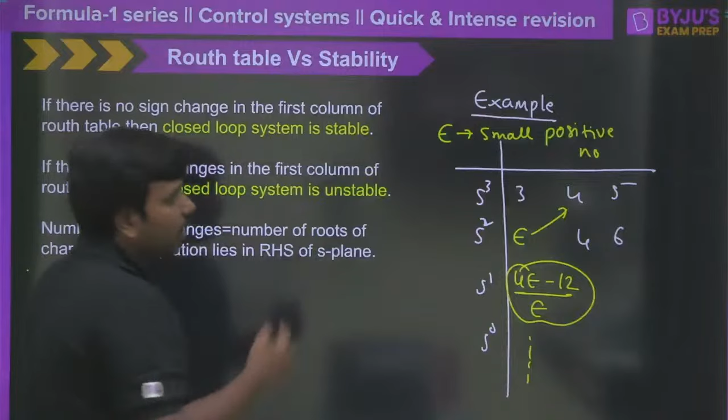Clear? So that is how we continue the table with a small positive number called epsilon, in case the first element of a row becomes 0 anywhere. And that's what I have concluded here. Keep this conclusion in your notebook, it is very useful. The rest of the stability analysis is the same. After completing the entire Routh table with epsilon, look at the number of sign changes. If there are no sign changes, the closed loop system is stable.

Now there is one beautiful question that was asked to me in the IISc Bangalore interview, physics department. They were asking very simple questions at the start, like what do you mean by Laplace transform, what do you mean by linear system. You feel you know everything. Slowly they enhance the questions.

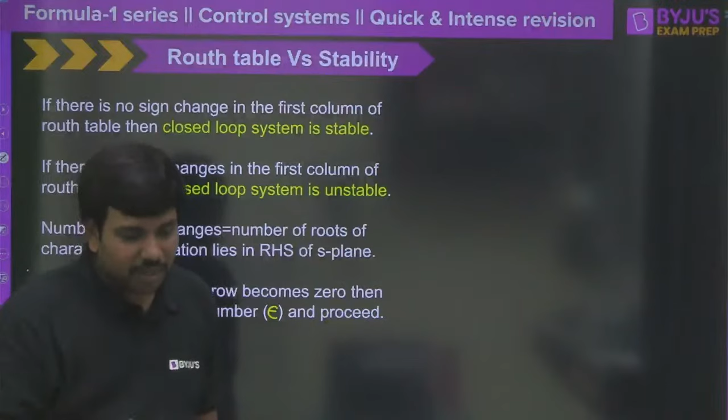Now let me ask one question to you. Is the RH criteria used to find the stability of the closed loop control system or the open loop control system? Every one of you must answer this question. Pankaj, 45 students are there. Anita, Nishant Kumar, Narasimha, Ravi. Actually, till you stop answering, they will keep on asking, either in IISc or IIT. So closed loop, good, very good.

Our main intention is to find out the stability of the closed loop system. You are applying the Routh table concept or Routh-Hurwitz criteria to the characteristic equation, forming the Routh table and analyzing stability. That means you are looking at closed loop system stability. That's simple to understand, isn't it?

Now let's move on to the next one, the all zero row, which is very important and where students commit mistakes. So first of all, why do all zero rows come into the picture? Very simple.

All zero rows. Now is this system a stable system or marginally stable system? Marginally stable. This is a very valid and very interesting point, so please be with me till the end of the Routh-Hurwitz criteria. Everything we do is for the closed loop system.

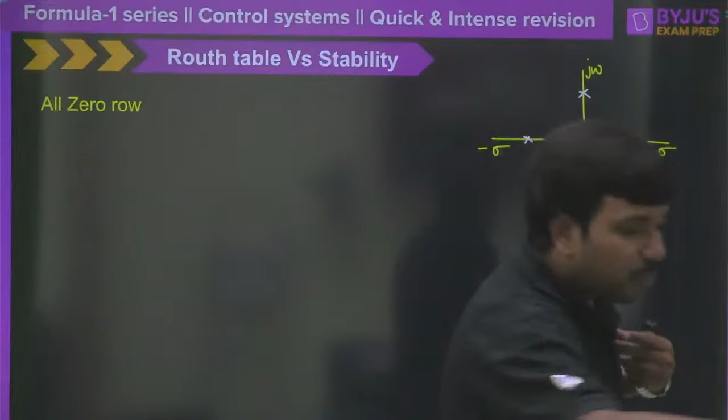I have this bottle with me, correct? In this bottle I can fill water, I can even fill buttermilk, correct? But most of the time I will use this bottle for water. Similarly, most times we use RH criteria as the mathematical tool to find closed loop system stability, but it is a mathematical tool and can be used even for the open loop control system.

Clear? So Narasimha, it is an easy question, right? Narasimha, is it clear to you? You guys are interacting a lot, that's really great.

Okay, very good. Now tell me, is this system stable or unstable? Somebody is saying marginally stable. Guys, how is it marginally stable? Anita, look at this one. Nishant, is it marginally stable or unstable? This is unstable. Why? You should not be satisfied only with the condition of having symmetrical poles. There is one pole on the right hand side, correct? That makes the system unstable.

Many times I have seen that whenever we have an all zero row, students start thinking it is a marginally stable system. No, when you have an all zero row, it is not necessary that you have a marginally stable system. You may have a marginally stable system or an unstable system, but definitely not a stable system. This is one case; there might be another case.

Now see here, if I have the poles like this, will an all zero row come here or not? Even one pole present... yes, now it's clear, very good. This is case 1. Here you will definitely get an all zero row because the poles are completely symmetrical, correct? But it is unstable.

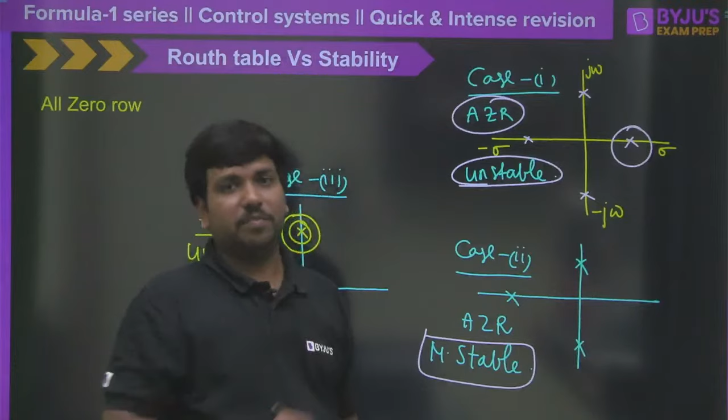Now think logically and tell me, will you get any chance where we will be having symmetrical poles just like that and the system may be stable also? Think logically, that will be very interesting. Okay, right. So now let me tell you the descriptive way of this. The first thing is all zero row is the result of the symmetrical poles here.

As I was saying, symmetrical roots of the characteristic equation. Roots of characteristic equation are nothing but the poles of the closed loop system. You must also remember this point. This is very, very important. Roots of characteristic equation, CE stands for characteristic equation, are nothing but poles of closed loop control system. Clear? Excellent, right?

So now all-zero row, as I was saying, this is fine. And the second thing is, order of the all-zero row is equal to the number of symmetrical poles. Clear? Next one, I'll tell you. When we have all-zero row, we are going to frame auxiliary equation.

This is important. So let me say, suppose we are having s power 5, s power 4, s power 3, s power 2, s power 1. S power 5 I have something, and s power 4 is also having some value here, right? But s power 3 we are having all zeros here. So this would be considered as an all zero row. If we get all zero row, what we will do?

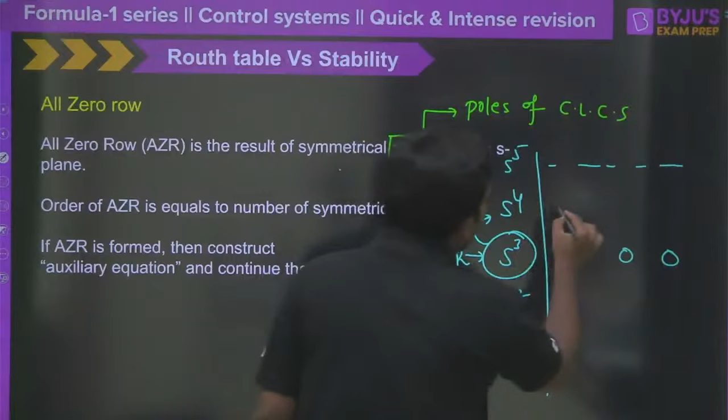We will go to one step ahead of this one, s power 4. So let us assume that in s power 4 we have some data like 4, 3, 2. So then how we will frame the auxiliary equation now? The auxiliary equation is equal to 4 times s power 4 plus 3 times s square plus 2. Clear? But where is the all zero row? At s cube. And when we have all zero row, we cannot continue this.

This means 4 symmetrical roots. Good. Very good. Correct, yes, Pramit. So you have auxiliary equation order is 4. Now it is not just 4 roots; that is the meaning of that: 4 roots are symmetrical in S plane. Now we have 4 into s power 4 plus 3 into s square plus 2. How do we get the coefficient of the s power 3?

Every one of you please message me in the comment section. Great response from your side. Excellent. Right? So if you have 4th order like this, you need the 3rd order. From the 4th order to get the 3rd order, what is the way?

What is the mathematical expression or function? For 4th order we need to fill the 3rd order. Then what to do? We have to derivate or differentiate. That means take this auxiliary equation and differentiate this with respect to s. Then you will be getting 16 into s power 3 plus 6 into s. This 16 and 6 we will take here, write 16 here and 6 here, and continue to work out the same thing. So we will continue the table.

Now I hope you understood why we are taking the differentiation here. Our idea is if you take the differentiation, then power of 4 will become power of 3, and I can write the coefficients here. That is the reason why we take the differentiation and continue. I hope you understood this.

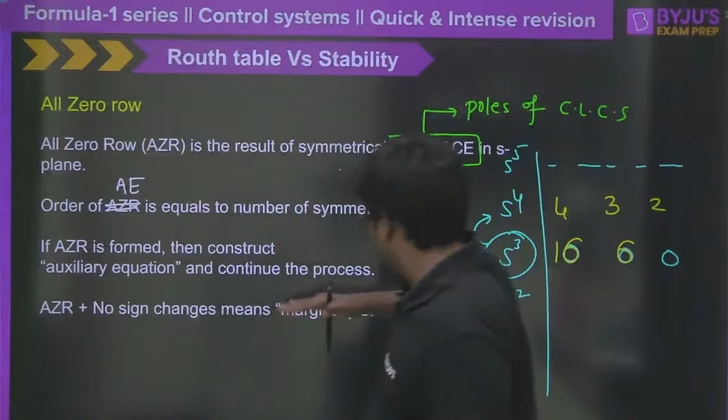Now let me ask the most crazy question here. All of you please see and tell me clearly: you have all zero row plus no sign changes. What does it mean? Don't look at this, tell me. All zero row plus no sign changes, what do you mean by this?

All zero row indicates the symmetrical poles. No sign changes means there are some poles on the j omega axis, non-repeated poles. So the system is marginally stable. That means all zero row and no sign changes means your pole locations may be like this. Let me show you, your pole location might be like this. All zero row means this one, here 1 and 1 may be like this. This is your pole location.

So marginally stable. Now, all zero row plus sign changes means unstable system. In this case, how does it exactly look? 1, 2, 3 like this - this is one combination. Or there might be another combination where it has repeated roots here and here also. There might be repeated roots, or maybe there's a chance one more root may be here also, that's also possible. So we must understand there are only two possible cases: either marginally stable or unstable.

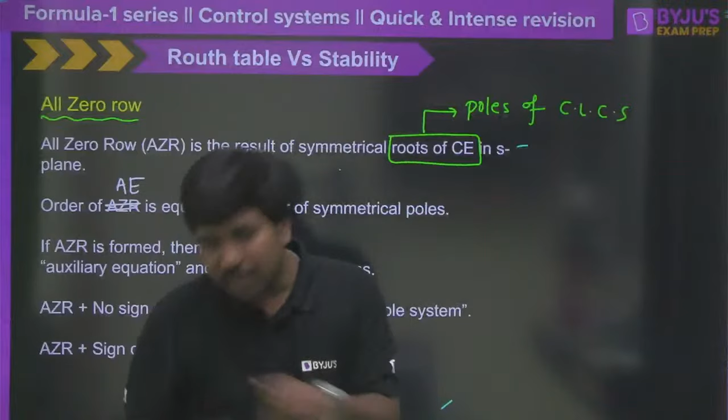Many times people think whenever they get all zero row, the system is marginally stable only. No, the system may be marginally stable, or the system may be unstable. The difference is: all zero row plus no sign changes leads to marginally stable system. All zero row plus sign changes indicates an unstable system. Hope you understood this.

For repeated roots, repeated poles, at least another row needs to be zero. Good, good, yes correct, Pramit.

Excellent, fantastic, nice. So now coming to the legend of the control system, that is root locus, right? I think we may take a little bit more time today, it may take another 45 minutes. Hope you guys can bear with me. It seems you guys are also interested, so let me continue this.

Now the first thing is, why is root locus so popular? In simple words, the main purpose of root locus is to see what would be the value of the best gain k such that the roots of the characteristic equation lie on the left hand side of the S-plane. Why? Because if the roots lie on the left hand side of the S-plane, the closed loop system is stable. That means inherently root locus also aims to decide the stability of the closed loop system.

With the root locus we can even find the value of zeta, we can find the value of omega n. As we are able to find the zeta value, omega n and all these things, we can even find the time domain specifications from the root locus. That's why people say root locus can be used for stability analysis.

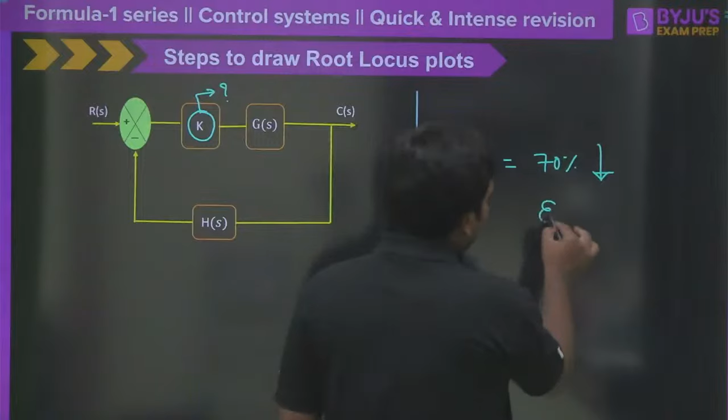Root locus can also be used for performance improvement. Suppose the percentage of peak overshoot for a system is coming around 70%, and I don't want to see that. So I want to reduce the peak overshoot. If I want to reduce it, I need to know how to increase the damping coefficient, because if you increase the damping factor, the percentage of peak overshoot will reduce. So how do we increase the zeta value?

We can increase the zeta value by changing the controller gain, k. If you change the value of k, the zeta value of the overall closed loop system can be increased. If the zeta value is increased, the percentage of peak overshoot can reduce. If the percentage of peak overshoot is reduced, then I can say the performance of the system is improving. So tell me, what is the main focus of the root locus now?

The main focus is to identify what value of k can make the closed loop system stable. That is number one. Number two is what value of k can improve your performance - that means reducing the peak overshoot, reducing the settling time, giving a faster response, or reducing the steady state error. All these things we can do with the root locus. That's why root locus is considered a hero of the control system. Hope you understood the logic behind this.

Now the very first thing you should know: when you have a closed loop system like this, if you find the closed loop transfer function, T of s is equal to k into g of s, divided by 1 plus k into g of s into h of s. Of course, we call the denominator the characteristic equation. This you know very well, even better than me.

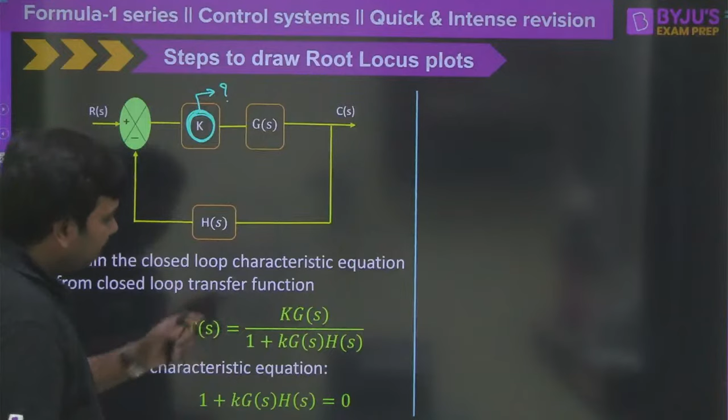Now, tell me when this system can be unstable. Suppose 1 plus k into g of s into h of s - let's make k equal to 1 for some time. If k is equal to 1, you will be having something like g of s by 1 plus g of s into h of s.

Then the magnitude condition would be written as: modulus of g of s into h of s must be equal to 1. The angle condition is: at any particular value of s, the phase of the loop gain must be equal to odd multiple of 180, plus or minus 180. If at any value of s the magnitude is equal to 1 and the phase condition is satisfied, then we can say that point is on the root locus.

I hope you know about the magnitude condition as well as the angle condition, but these are required only for basic understanding - I will explain the shortcut to find whether a particular point is on the root locus or not. This is called the magnitude condition, this is the angle condition, and while making the angle condition, the phase must be equal to plus or minus 2q plus 1 into 180 degrees, or plus or minus 180 degrees.

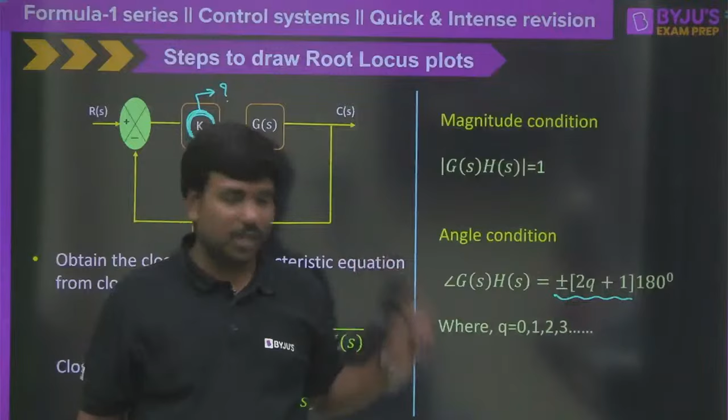But in real time classical systems, we will be having only negative phase, because the number of poles will be either equal to the number of zeros, or many times the number of poles are more than the number of zeros. Then there is a huge probability to get the negative phase. That's why most of the time it should be equal to minus 180 degrees of odd multiple. But mathematics will say the angle criteria is this.

Now the very first thing - what is the first step in root locus? Any one of you - Anita and Harit Nataraju, Lakshman, right? What is sluggish time?

There is no word called sluggish time, to be frank. If the settling time is more, we say the response is sluggish. That means if it is taking long time to settle down, then we can say the response is sluggish. Clear? Right, any one of you, what is the first step for root locus?

The very first step for the root locus is always to identify the open loop transfer function of the closed loop system, G of s into H of s, which is nothing but the loop gain. You must take this. Suppose we assume it is given like K into G of s into H of s all put together, or otherwise you can take it like this. Let us take G of s into H of s alone.

It would be like 1 by s into s plus 1 into s plus 2, something like this. What would be the first step here in root locus? Identifying the number of poles and number of zeros. The total number of poles we call capital P, which is equal to 3 here. Total number of zeros, we don't have any finite zeros, so that will be equal to 0.

What are the poles here? The first pole would be written as 0, the second pole as -1, and the third pole as -2. This is the first step. Every time if we have zeros, we have to write zeros. That is simple. Now let me take this as an example so that things will be very easy and smooth for us.

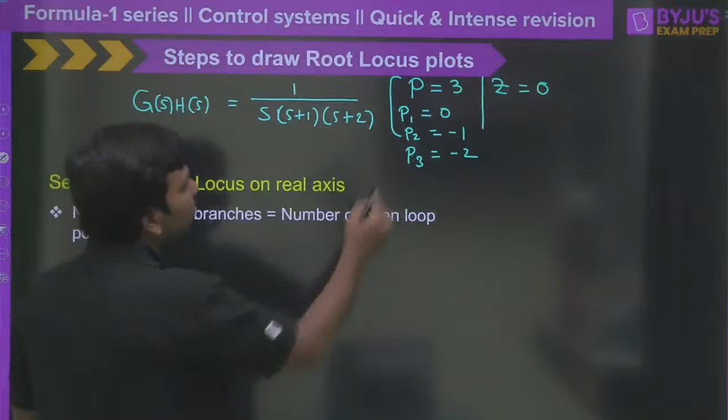So here, when we have number of open loop poles as 3, the total number of root locus branches and the number of open loop poles are the same. Why? Because the root locus branch always starts from the open loop pole. It means if we have 3 open loop poles, then 3 root locus branches will start. If you have 4 open loop poles, you will have 4 branches that start from the poles. Clear? Open loop poles, right?

So now look at the second important point. Root locus always starts from the open loop finite pole and ends at a zero, a finite zero. This is very, very important. If you don't have a finite zero, then it will go to either plus or minus infinity. Clear? Either plus infinity or minus infinity.

That means the starting point of the root locus branch is always the open loop pole. The ending point of the root locus branch is either a finite zero or infinity. Clear? So you see here, in this case we don't have any finite zero, and we have 3 root locus branches. All root locus branches should now terminate only at either plus infinity or minus infinity. Just listen slowly, you will understand.

So the third point is root locus is always symmetrical about the real axis. The great part of this is, if you draw half of the root locus which is above the real axis, below the real axis it will be a replica. For example, if I say there is some root locus like this, assume that...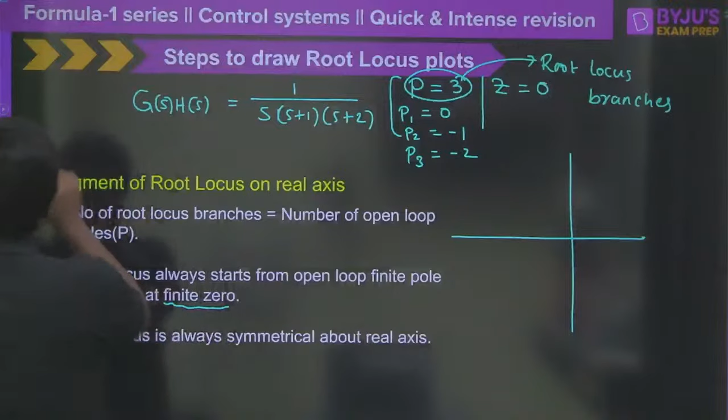When you plot the graph, how does it look like here? This might be your sigma, and this is minus sigma here. Of course, this is j omega, and this is going to be minus j omega, isn't it? This is how your chart looks like here. And we have 3 poles here, isn't it? S is equal to 0, one pole here. So for the time being, let me take S is equal to 0, S is equal to minus 1 here, and S is equal to minus 2 here.

The great part of this is, those students who know this better way: if you draw above the real axis, the same thing can be replicated even on the downside. That means the root locus is symmetrical about the real axis. Clear? Now let's try to understand what you mean by starting from the real axis and going away like this.

So please see here, all of you. We are having 3 poles, and we will be having 3 different root locus branches. But how will they start? Whether this root locus will start this side or this side, how are they going to start? How to decide that? Can any one of you tell me what is the way to decide this one? Simple.

We will take one point here, in this segment, and see, right side to this point, how many open loop poles are there? There are no open loop poles, 0, and there are no open loop zeros here, correct? So when we add P plus Z, number of poles plus number of zeros, it is 0. But suppose you take a point here and look at the right side of this point, how many open loop poles are there? Only 1 pole, that is 1.

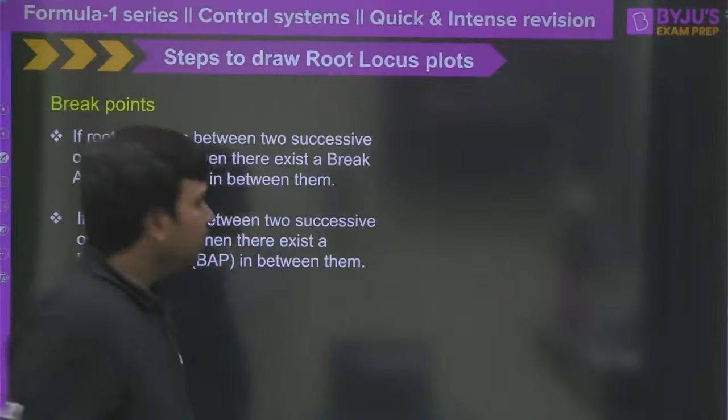Clear? So if the root locus exists between two successive poles, there exists a meeting point called a breakaway point. Suppose the root locus exists between two successive zeros, then what will we have in between? Can any one of you tell me? Narasimha, Nishant and all of you. If the root locus lies between two successive poles, there is a chance to have a breakaway point. Similarly, if the root locus exists between two successive zeros, there is a chance we have a break-in point there.

In a simple way, assume there is 1 pole here, 1 pole here, and maybe a 3rd pole here. Look at the beautiful point: the root locus lies in between these. One comes this way and one comes all the way like this. So if the root locus lies between two successive poles, naturally both will mix together, and that will be called a breakaway point, right?

Another way of logic here is, look at that. Suppose in this case we have one pole here, or else, instead of taking the pole, let me take a zero here, for example.

So assume that zeros are here. We have one zero here and another zero here, correct? So if you have two successive zeros here, and I'm very sure that the root locus lies in between these two, then what is the direction here? Root locus ends only at the zero. So that means this is the direction. So how is it possible?

Definitely there must be some point here at which the root locus branches come into this one, and then after meeting, only then can they terminate at both sides. This is called a breakaway point, correct? But these two root locus branches, here one and here one, might be coming from the breakaway point of something else. Clear? That is how you should start thinking.

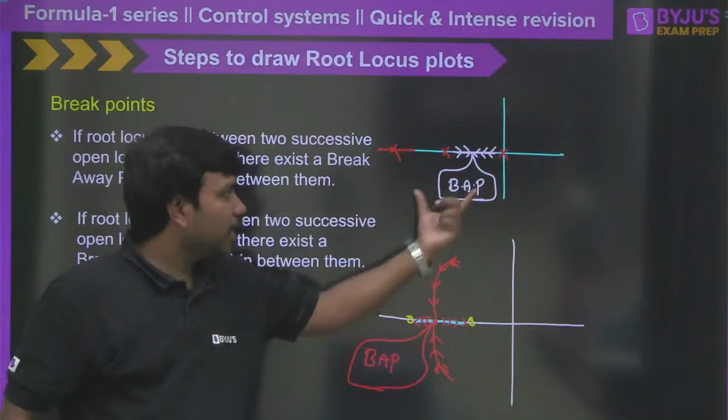So the conclusive statement is, if the root locus lies between two successive poles, that is called a breakaway point. If the root locus lies between two successive zeros, then that is called a breakaway point. This is break-in point, I am extremely sorry. This is break-in point. Let me write it down. This would be considered here as the break-in point. Excellent.

Now what will happen when the root locus branches are coming all the way like this and meeting together? Have you ever seen, if you and your friend are both walking too fast and collide at exactly equal pace? At the time of collision, what will be the velocity?

Anita, you tell me, at the time of collision, what will be the velocity? Ravi, Narasimha, Nishant and Anita, oh Ravi. Somebody is asking some question, right?

So at the time of perfect collision, what is the velocity? The velocity will be zero, correct? Both of you are going to stop. That is the reason why at the breakaway point the sensitivity of the root is going to be zero. So we need to take dK/ds equal to 0. So to find the breakaway point or break-in point, the only simple rule is dK/ds must be equal to 0.

So first consider the characteristic equation. After finding the characteristic equation, express it in terms of K, then set dK/ds equal to 0 and solve this, then you are going to get the breakaway point and break-in point.

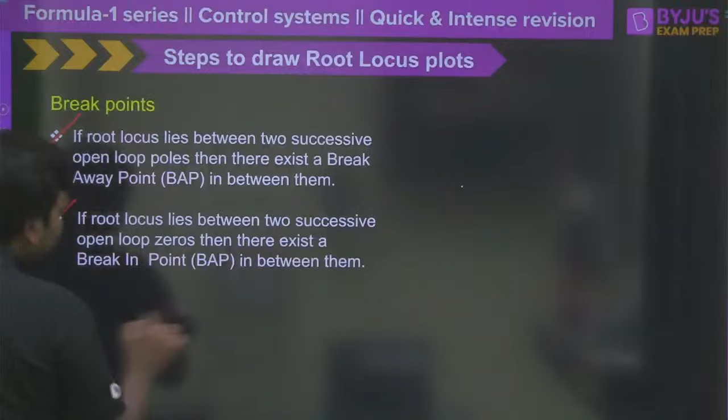Okay. So every time, the best option is, we have the characteristic equation. Let us say the characteristic equation is 1 + K G(s) H(s) = 0. Then we say K = f(s), so we take everything else to the other side. After that, we make dK/ds = 0 and solve this. Then you will have the value of s.

How to decide the breakaway point and break-in point? After solving this, if you get a value between two successive open loop poles, you have to check whether that point is on the root locus branch or not. If it is, then between two successive poles means it is a breakaway point. If it is between two successive zeros, it is a break-in point. This is the procedure to find the breakaway point as well as the break-in point.

Moving ahead to the next one, that is asymptotes. Previously I told you that if the number of open loop poles is more than the number of open loop zeros, then we have P minus Z roots which cannot terminate at open loop zeros. They have to go to either plus infinity or minus infinity. But in which direction they go will be decided by the asymptotes. Clear? Suppose the number of poles is equal to 3 and the number of zeros is equal to 0.

Ravi is asking a question. For closed loop, it is not valid, sir. Which question? Which question are you asking for closed loop?

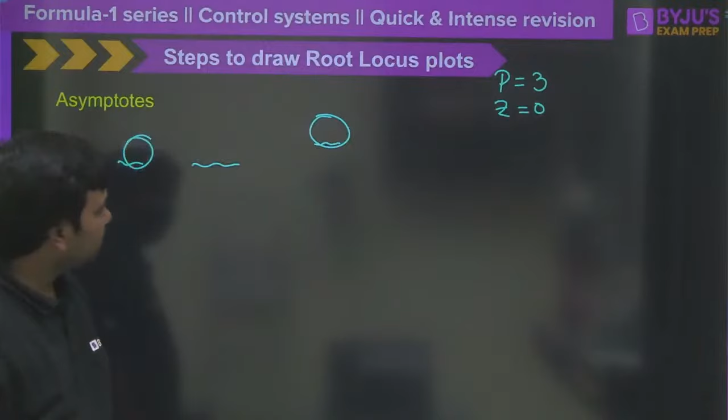No, actually for root locus, the meaning of the root locus is this: the locus of the roots of the characteristic equation. Roots of the characteristic equation are definitely for the closed loop system only, right? In root locus, you should not get that question also, correct? Because the basic definition is for the closed loop system, right? So, P minus Z, yes, Ravi Shankar, no.

BAP and BIP, basically the breakaway point and break-in point, are nothing but the locations of closed loop poles. They are not the locations of open loop poles. Because when we are increasing the value of k, roots of the characteristic equation will move and they will collide at a point, correct? Roots of the characteristic equation moving and meeting means the poles of the closed loop system are meeting. It means that we are actually doing this only for the closed loop system. Clear? So we might get angle value.

Yes, right? So if P is greater than Z, that means 3 root locus branches will start from open loop poles, but no zeros are there. When you don't have any zeros, then all root locus branches have to go to either plus infinity or minus infinity, right? But in what way will they go? So first of all, number of asymptotes is equal to P minus Z. Why? Because P is greater than Z. Here P is 3 and Z is 0. Then P minus Z will obviously be equal to 3, because you require 3 asymptotes to guide 3 root locus branches to plus or minus infinity.

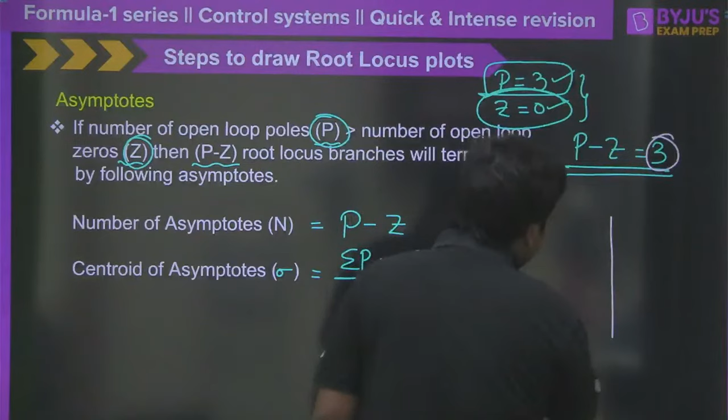Correct? So moving ahead, centroid of the asymptotes. The centroid can be calculated as sum of the poles minus sum of the open loop zeros divided by number of poles minus number of zeros. Now, why is the centroid required? You understood that 3 asymptotes are required. But where do we start these 3 asymptotes on the real axis? Should I start from origin, or at this value? That will be informed by the centroid. So that's why centroid is also very important. Centroid is equal to sum of all open loop poles minus sum of all open loop zeros divided by P minus Z.

Clear? So now moving ahead, we understood that we have to draw the asymptotes from this point. This might be the centroid. Good. But at what angle do I need to draw them? 60 degrees, 180 degrees, 120 degrees? That will be informed by angle of asymptotes. Angle of asymptotes, can any one of you tell me? We usually write it as phi a. Phi a is equal to odd multiples of plus or minus 180: (2q plus 1) into 180 degrees, divided by P minus Z. And q may go from 0, 1, 2, and so on up to P minus Z minus 1. Simple.

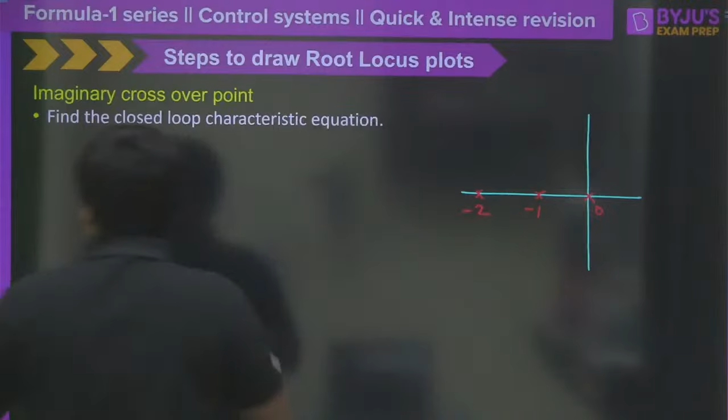Good. Now moving ahead, the imaginary crossover frequency. The next point is whether the root locus may cut the imaginary axis or not. There are many chances. Most of the time, root locus branches can meet here. Suppose we have taken 0, minus 1 and minus 2, something like this. In this example, they will come here, start moving like this, and cut the imaginary axis.

Correct? So if the root locus branch cuts the imaginary axis, what does it mean? Right? So this is the value of K, exactly at this point. Now it may be having like j2 or j3 or j4 or j5. We don't know whether that is j2 or j3 or j4. But we know that at that particular value, s will become jω.

Why? When the root locus branch cuts the imaginary axis, at this point the value will be only complex conjugate. It is simply complex conjugate with no real part. That is the reason why we keep s = jω. Hope you understood this. So exactly at the imaginary crossover frequency, we can say s = jω.

Because exactly at the cutting point, the root locus cuts the jω axis with no real value for s. So we will get the characteristic equation first and then replace s = jω, and then convert that into a very simple algebraic equation. On both sides we compare the real part and imaginary part, and finally we find the value of K at which the root locus cuts the imaginary axis.

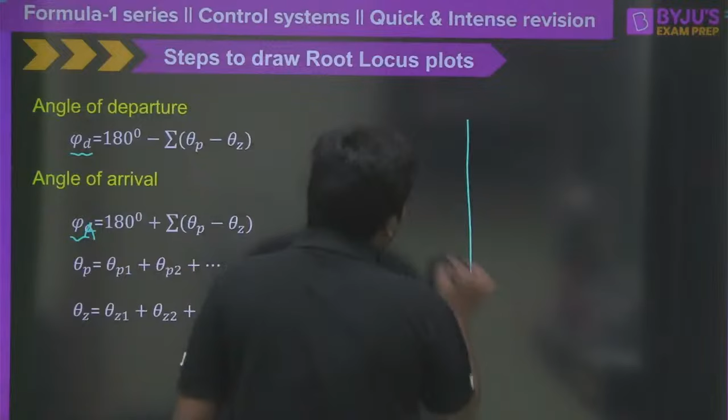Clear? So suppose we have complex poles here. As we discussed earlier, from the complex pole, the root locus branch will always start coming out. Now when it is coming out, if I draw a line here, whether it will come like this, or like this, or go and come like this, in what way it will come will be decided by the angle of departure.

Clear? So the angle of departure comes into the picture only when we have complex conjugate poles. I hope you understood this. To find the angle of departure φd, we use the formula 180° − (Σθp − Σθz). And for angle of arrival, everything is the same, but it is 180° plus this.

You might know this: Σθp = θp1 + θp2 and so on. If you want to find the angle of departure at this pole, draw the vectors from all the poles in the system to that particular pole and measure the angles. Those angles contributed by the poles are θp1, θp2 respectively, and their sum is Σθp. Clear? Yes, very good Anita, excellent. When we have complex poles and complex zeros, we use the angle of arrival and angle of departure.

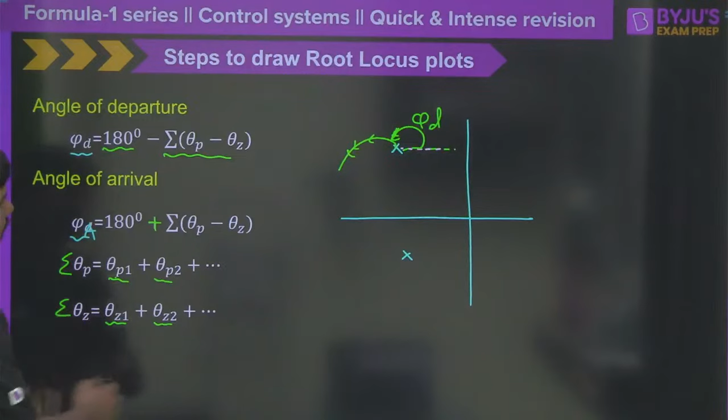So therefore, it should be written as sigma of theta p minus sigma of theta z, and this is considered as the net angle. And with the net angle contribution by the poles and zeros, 180 minus net angle is going to give the angle of departure, and 180 plus net angle will give the angle of arrival.

Clear? So angle of arrival and angle of departure, yes, PDF we will get, Narasimha, sure you will be getting it. So angle of arrival and angle of departure are concepts that come into the picture only in the case of complex poles and complex zeros, right?

Apart from this, there are some important concepts like how do we calculate the gain, right? So suppose we have a root locus plot like this, and they are asking to find the value of k at this point. What should we do? If you want to find the value of k at any particular point on the root locus, simple: draw the vectors from all poles and zeros and find out the magnitudes.

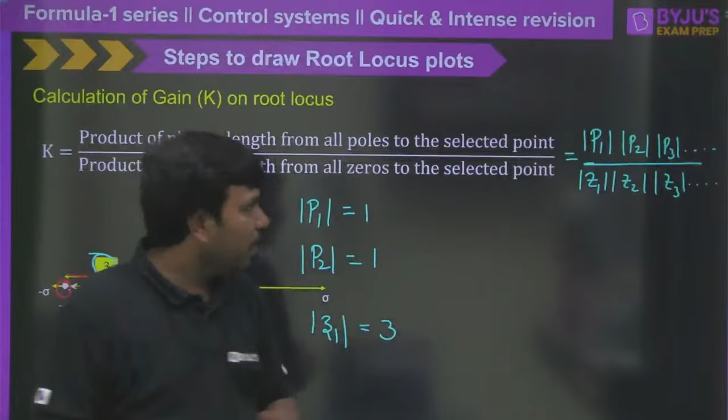So after finding all these values, come back here: the product of the distances from all the poles, P1, P2, P3, and so on, divided by the product of the distances from all zeros. That is going to give the value of your gain. Very simple. Suppose you don't have any finite zeros, then we have to take the denominator equal to 1. Clear? The denominator is equal to 1.

Very good, excellent. Kandula Sudhir, very good, very good. Happy to see your responses even after 11:20 also.

Really very happy, right? So that's all about the root locus. I hope we have done almost 50 to 60% of the control system.

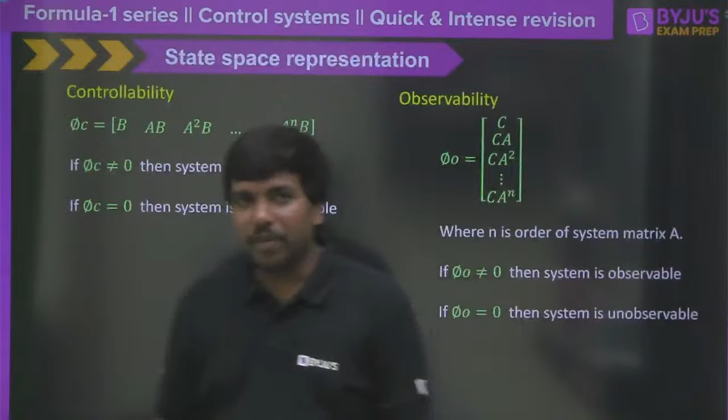If anybody is so serious, you can prepare this by looking at the PPT, PDF also. But as I suggested, we will definitely have one more session because almost 40% or 50% is left.

Okay, I'll inform about the class. This class means a lot to me. Thank you very much, Anita. Very much. Thank you very much.

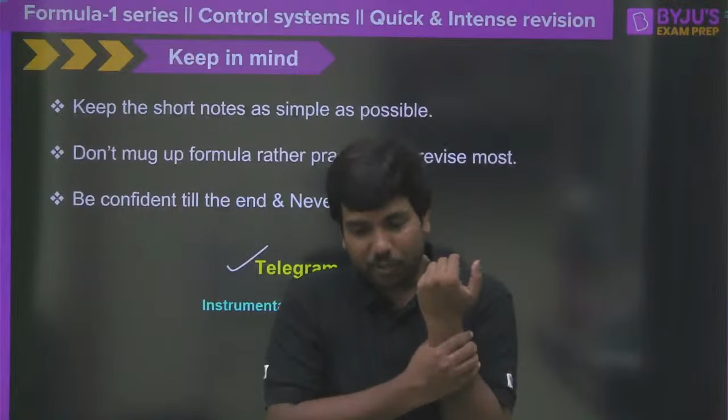We get more, but total subject in one session is difficult. Yes, Kandula, that is correct. You really understood the situation. Even today I also understood.

But definitely we'll try to make it as best as possible, because I don't want to put it just like this and say that it's completed. I don't do that, because you are sincere guys, you look very serious for the GATE examination. We'll have one more session and have a pleasant discussion about the remaining part of the subject. Meanwhile, if you want the PDF, either you can get it from the Telegram channel or from the description link. Clear?